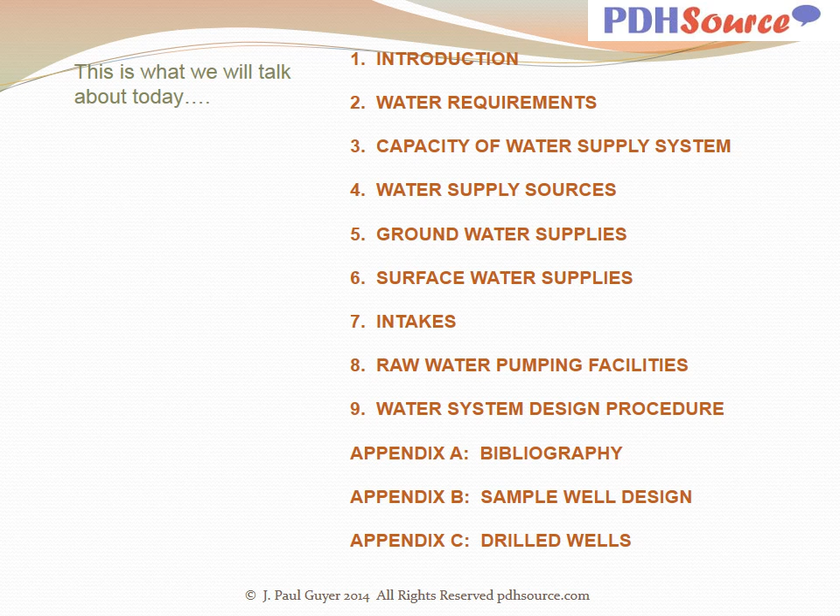This discussion provides an introduction to selecting water sources and determining water requirements for developing suitable sources of supply from ground or surface sources. These guidelines are applicable to the selection of water sources and planning and designing supply systems. There are many professional references available in the literature to engineers interested in water supply principles and practices.

The following are general definitions related to water supplies. Waterworks: all construction, structures, pipe, equipment, etc., required for the collection, transport, pumping, treatment, storage, and distribution of water. Supply works: dams, impounding reservoirs, intake structures, pumping stations, wells, and all other construction required for the development of a water supply source. Supply line: the pipeline extended from the supply source to the treatment works or distribution system.

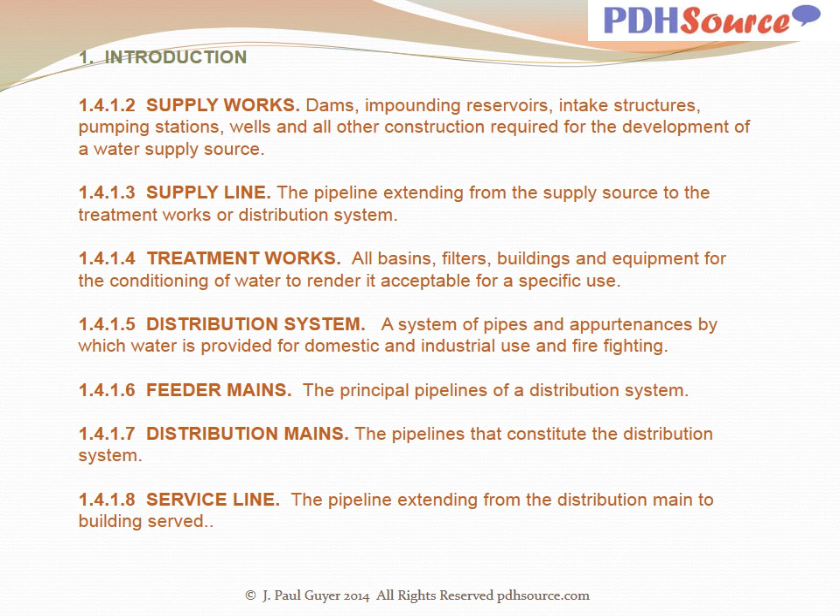Treatment works: all basins, filters, buildings, and equipment for the conditioning of water to render it acceptable for a specific use. Distribution system: a system of pipes and appurtenances by which water is provided for domestic and industrial use and firefighting. Feeder mains: the principal pipelines of a distribution system. Distribution mains: the pipelines that constitute the distribution system. Service line: the pipeline extending from the distribution main to the building served.

Effective population includes resident personnel plus an allowance for non-resident personnel, derived as follows. The design allowance for non-residents is 50 gallons per person per day, whereas that for residents is 150 gallons per person per day. Therefore, an effective population value can be obtained by adding one-third of the population figure for non-residents to the figure for residents. Effective population equals non-resident population divided by 3, plus the resident population.

Capacity factor: the multiplier applied to the effective population figure to provide an allowance for reasonable population increase, variations in water supply, uncertainties as to actual water requirements, and for unusual peak demands whose magnitude cannot be accurately estimated in advance. The capacity factor varies inversely with the magnitude of the population in the water service area. Design population: the population figure obtained by multiplying the effective population figure by the appropriate capacity factor. Design population equals effective population times the capacity factor.

Required daily demand is the total daily water requirement. Its value is obtained by multiplying the design population by the appropriate per capita domestic water allowance and adding to this quantity any special industrial, aircraft-wash, irrigation, air conditioning, or other demands. Other demands include the amount necessary to replenish, in 48 hours, the storage required for fire protection and normal operation. Where the supply is from wells, the quantity available in 48 hours of continuous operation of the wells will be used in calculating the total supply available for replenishing storage and maintaining fire, domestic, and industrial demands that cannot be curtailed.

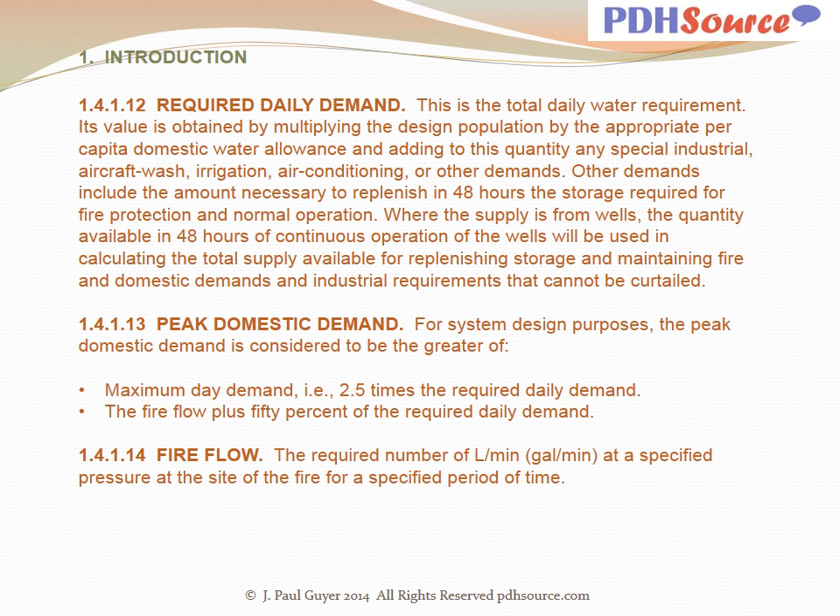Fire flow: the required number of gallons per minute at a specified pressure at the site of the fire, for a specified period of time.

Fire demand: the required rate of flow of water in gallons per minute during a specified fire period. Fire demand includes fire flow plus 50% of the required daily demand, and, in addition, any industrial or other demand that cannot be reduced during a fire period. The residual pressure is specified for either the fire flow or essential industrial demand, whichever is higher. Fire demand must include flow required for automatic sprinkler and standpipe operation, as well as direct hydrant flow demand when the sprinklers are served directly by the water supply system.

Rated capacity: the rated capacity of a supply line, intake structure, treatment plant, or pumping unit is the amount of water which can be passed through the unit when it is operating under design conditions.

Cross connection: the two types recognized are as follows. First, a direct cross connection is a physical connection between a supervised potable water supply and an unsupervised supply of unknown quality. An example of a direct cross connection is a piping system connecting a raw water supply used for industrial firefighting to a municipal water system.

Second, an indirect cross connection is an arrangement whereby unsafe water or other liquid may be blown, siphoned, or otherwise diverted into a safe water system. Such arrangements include unprotected potable water inlets in tanks, toilets, and lavatories that can be submerged in unsafe water or other liquid. Under conditions of peak usage of potable water or potable water shut off for repairs, unsafe water or other liquid may backflow directly or be back siphoned through the inlet into the potable system. Indirect cross connections are often termed backflow connections or back siphonage connections. An example is a direct potable water connection to a sewage pump for intermittent use for flushing or priming.

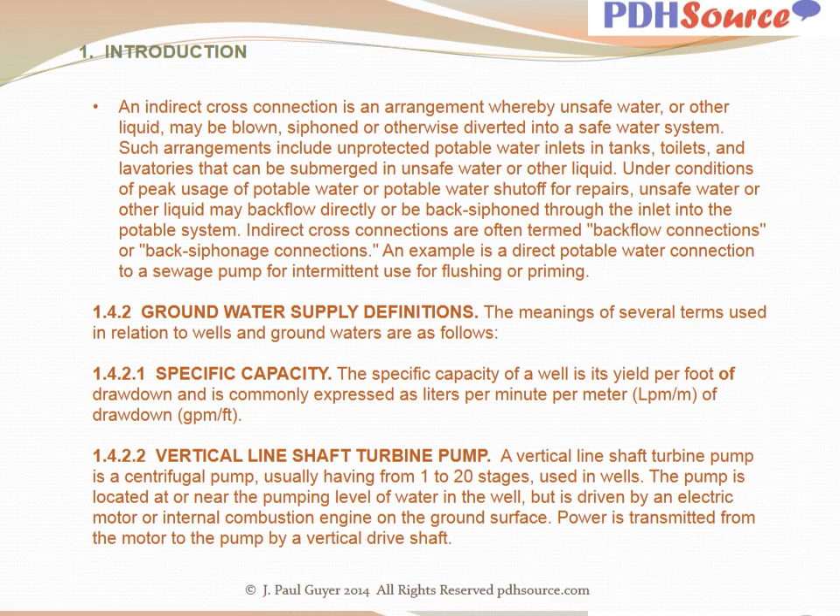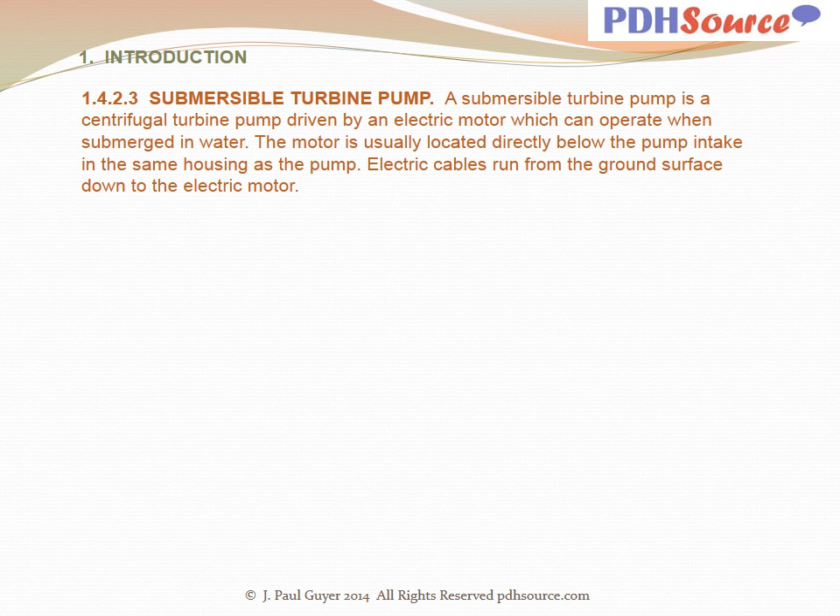Submersible turbine pump. A submersible turbine pump is a centrifugal turbine pump driven by an electric motor which can operate when submerged in water. The motor is usually located directly below the pump intake in the same housing as the pump. Electric cables run from the ground surface down to the electric motor.

Now, some comments on water requirements. First, domestic requirements. The per capita allowances given in Table 2.1 are illustrative only of domestic water requirements. These allowances do not include special purpose water uses such as industrial, commercial, institutional, air conditioning, and irrigation.

Fire flow requirements. The system must be capable of supplying the fire flow specified plus any other demand that cannot be reduced during the fire period, at the required residual pressure and for the required duration. The requirements of each system must be analyzed to determine whether the capacity of the system is fixed by the domestic requirements, by the fire demands, or by a combination of both.

Where fire flow demands are relatively high or required for long duration, and population and/or industrial use is relatively low, the total required capacity will be determined by the prevailing fire demand. In some exceptional cases, this may warrant consideration of a special water system for fire purposes, separate in part or in whole from the domestic system. However, such separate systems will be appropriate only under exceptional circumstances and in general are to be avoided.

With regard to irrigation, the allowances indicated in Table 2.1 include water for limited watering of planted and grassed areas. However, these allowances do not include major lawn or other irrigation uses.

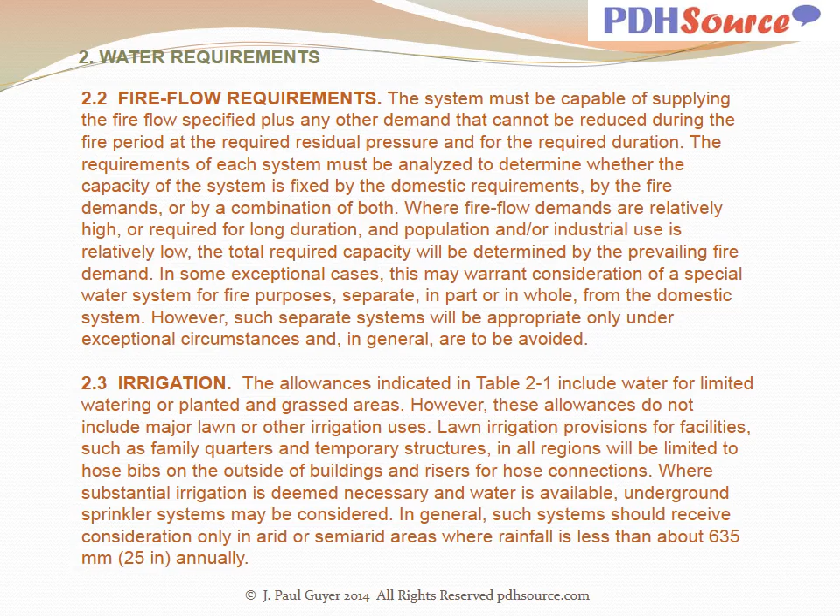Backflow prevention devices such as a vacuum breaker or an air gap will be provided for all irrigation systems connected to potable water systems. Installation of backflow preventers will be in accordance with the applicable local plumbing code. Single or multiple check valves are not acceptable backflow prevention devices and will not be used. Direct cross connections between potable and non-potable water systems will not be permitted under any circumstances.

Effluent from wastewater treatment plants can be used for irrigation when authorized. Only treated effluent having a detectable chlorine residual at the most remote discharge point will be used. Where state or local regulations require additional treatment for irrigation, such requirement will be complied with. The effluent irrigation system must be physically separated from any distribution systems carrying potable water.

A detailed plan will be provided showing the location of the effluent irrigation system in relation to the potable water distribution system and buildings. Provisions will be made either for locking this sprinkler irrigation control valve or removing the valve handle so that only authorized personnel can operate the systems. In addition, readily identifiable non-potable or contaminated notices, markings, or coatings for wastewater conveyance facilities and appurtenances will be provided.

Another possibility for reuse of treated effluent is for industrial operations where substantial volumes of water for washing or cooling purposes are required. For any reuse situations, great care must be exercised to avoid direct cross connections between the reclaimed water system and the potable water system.

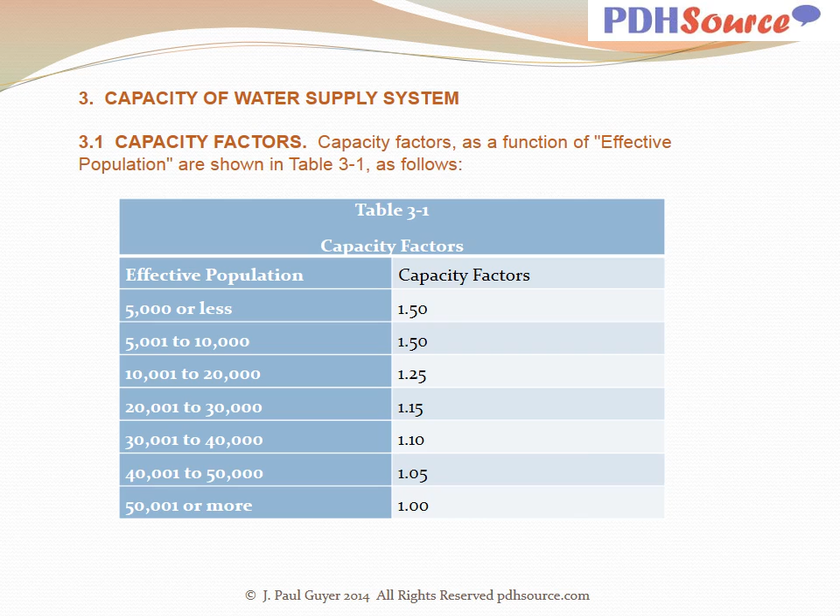The capacity factor will be used in planning water supplies for all projects, including general hospitals. The proper capacity factor is given in Table 3.1 and is multiplied by the effective population to obtain the design population. Arithmetic interpolation should be used to determine the appropriate capacity factor for intermediate project populations. For example, for an effective population of 7,200, interpolation yields a capacity factor of 1.39.

Capacity factors will be applied in determining the required capacity of the supply works, supply lines, treatment works, principal feeder mains, and storage reservoirs. Capacity factors will not be used for hotels and similar structures, and will not be applied to fire flows, irrigation requirements, or industrial demands.

The design of elements of the water supply system, except as noted, shall be based on the design population. Where special demands for water exist, such as those resulting from unusual firefighting requirements, irrigation, industrial processes, and cooling water usage, consideration must be given to these special demands in determining the design capacity of the water supply system.

Few, if any, entirely new water supply systems will be constructed. Generally, the project will involve upgrading and/or expansion of existing systems. Where existing systems are adequate to supply existing demands, plus the expansion proposed without inclusion of the capacity factor, no additional facilities will be provided except necessary extension of water mains.

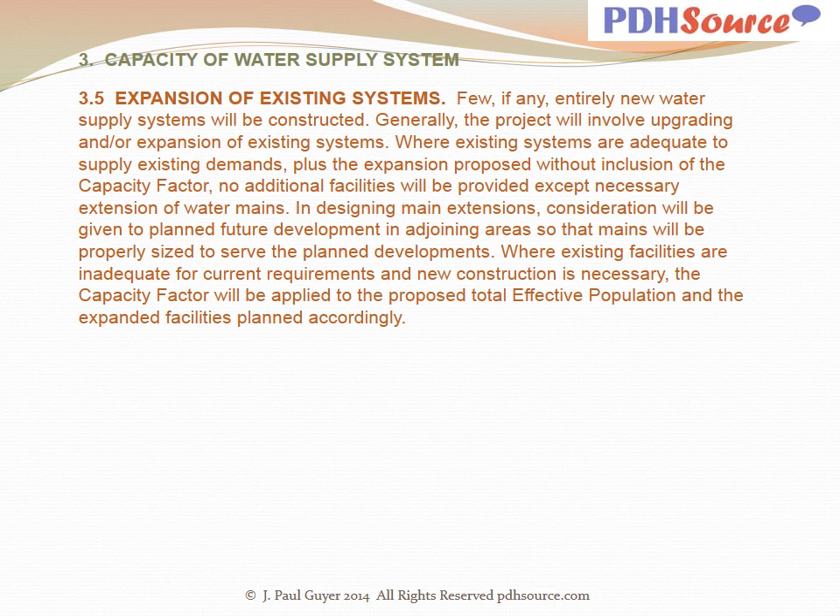Water supplies may be obtained from surface or ground sources by expansion of existing systems or by purchase from other systems. The selection of a source of supply will be based on water availability, adequacy, quality, cost of development and operation, and the expected life of the project to be served.

In general, all alternative sources of supply should be evaluated to the extent necessary to provide a valid assessment of their value for a specific installation.

Alternative sources of supply include purchase of water as well as consideration of development or expansion of independent ground and surface sources. A combination of surface and groundwater, while not generally employed, may be advantageous under some circumstances and should receive consideration. Economic as well as physical factors must be evaluated.

The final selection of the water source will be determined by feasibility studies considering all engineering, economic, energy, and environmental factors. Most water supply projects include expansion or upgrading of existing supply works rather than development of new sources.

If there is an existing water supply, thorough investigation will be made to determine its capacity and reliability and the possible arrangements that might be made for its use with or without enlargement. The economics of utilizing the existing supply should be compared with the economics of reasonable alternatives.

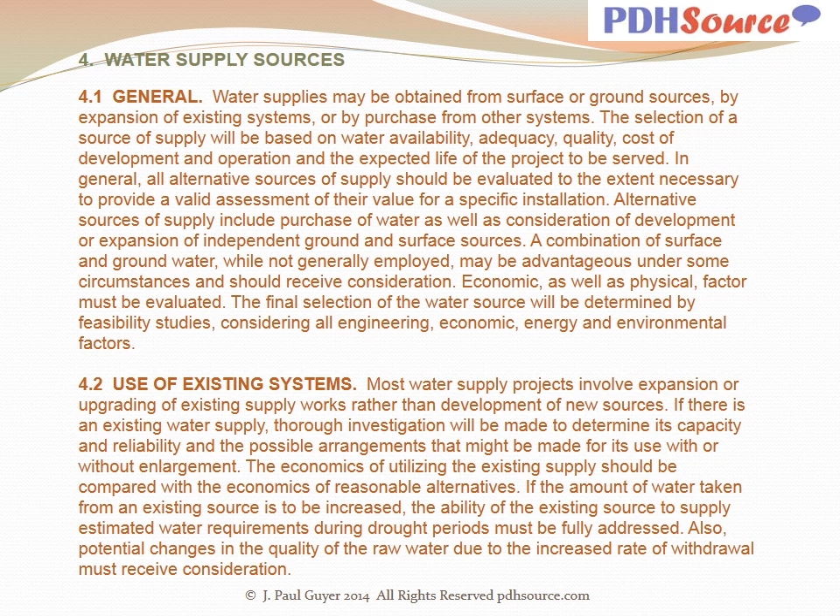If the amount of water taken from an existing source is to be increased, the ability of the existing source to supply estimated water requirements during drought periods must be fully addressed. Also, potential changes in the quality of the raw water due to the increased rate of withdrawal must be fully considered.

If the development is located near a municipality or other public or private agency operating a water supply system, this system should be investigated to determine its ability to provide reliable water service to the installation at reasonable cost. The investigation must consider future as well as current needs of the existing system, and in addition, the impact of the project on the water supply requirements in the existing water service area.

Among the important matters that must be considered are quality of the supply, adequacy of the supply during severe droughts, reliability and adequacy of raw water pumping and transmission facilities, treatment plant and equipment, high service pumping, storage and distribution facilities, facilities for transmission from the existing supply system, and costs.

In situations where a long supply line is required between the existing supply and the installation, a study will be made of the economic size of the pipeline, taking into consideration cost of construction, useful life, cost of operation, and minimum use of materials. A further requirement is an assessment of the adequacy of management, operation, and maintenance of the public water supply system.

Environmental policies, objectives, and guidelines must be observed, including guidelines for determining the adequacy of a potential raw water supply for producing an acceptable finished water supply with conventional treatment practices.

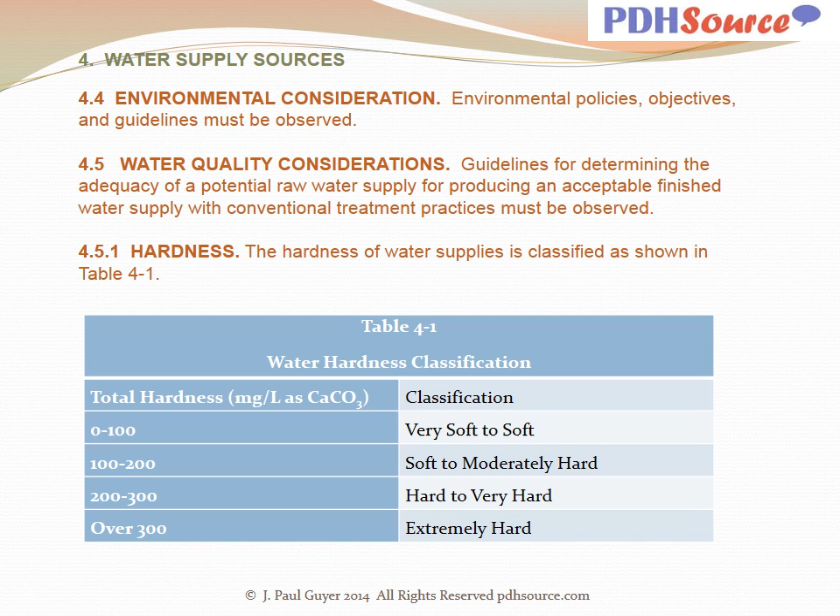Softening is generally considered when the hardness exceeds about 200 to 250 milligrams per liter. While hardness can be reduced by softening treatment, this may significantly increase the sodium content of the water where zeolite softening is employed, as well as the cost of treatment.

With regard to total dissolved solids, in addition to hardness, the quality of groundwater should be judged on the basis of dissolved mineral solids. In general, dissolved solids should not exceed 500 milligrams per liter, with 1,000 milligrams per liter as the approximate upper limit.

Chloride and sulfate cannot be removed by conventional treatment processes, and their presence in concentrations greater than about 250 milligrams per liter reduces the value of the supply for domestic and industrial use and may justify its rejection if development of an alternative source of better quality is feasible.

Saline water conversion systems such as electrodialysis or reverse osmosis are required for removal of excessive chloride or sulfate, and also certain other dissolved substances including sodium and nitrate.

The presence of certain toxic heavy metals, fluoride, pesticides, and radioactivity in concentrations exceeding recognized standards will make rejection of the supply mandatory unless unusually sophisticated treatment is provided.

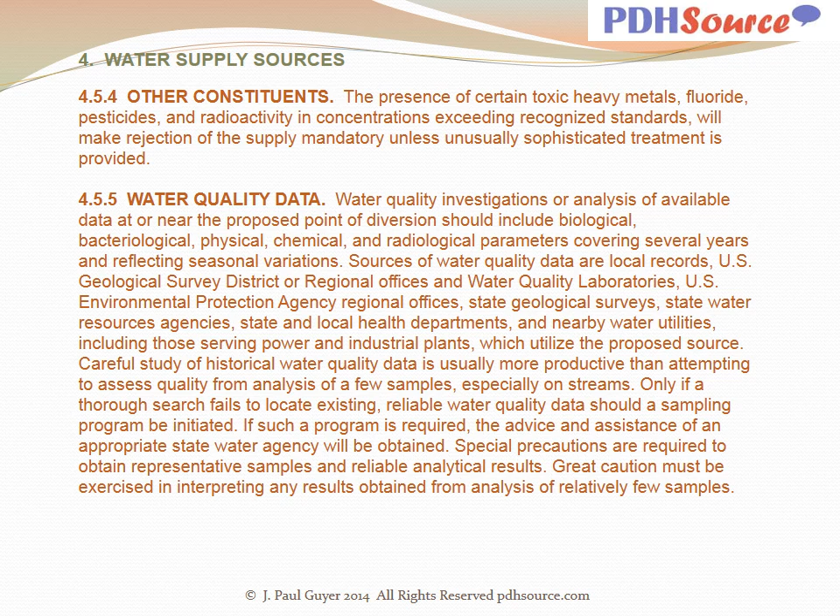If such a program is required, the advice and assistance of an appropriate state water agency will be obtained. Special precautions are required to obtain representative samples and reliable analytical results. Great caution must be exercised in interpreting any results obtained from analysis of relatively few samples.

The following items, as well as others, if circumstances warrant, will be covered in the investigation of existing sources: quality history of the supply, estimates of future quality, permits from regulating authorities and compliance history, description of source, water rights, reliability of supply.

Quantity now developed, ultimate quantity available, excess supply not already allocated, raw water pumping and transmission facilities, treatment works, treated water storage, high service pumping and transmission facilities, rates in gallons per minute at which supply is available, current and estimated future cost per 1,000 gallons, and current and estimated future cost per 1,000 gallons of water from alternative sources.

Distance from installation site to existing supply, pressure variations at point of diversion from existing system, ground elevations at points of diversion in use, energy requirements for proposed system, sources of pollution existing and potential, assessment of adequacy of management, operation, and maintenance, and modifications required to meet additional water demands resulting from supplying water system expansion.

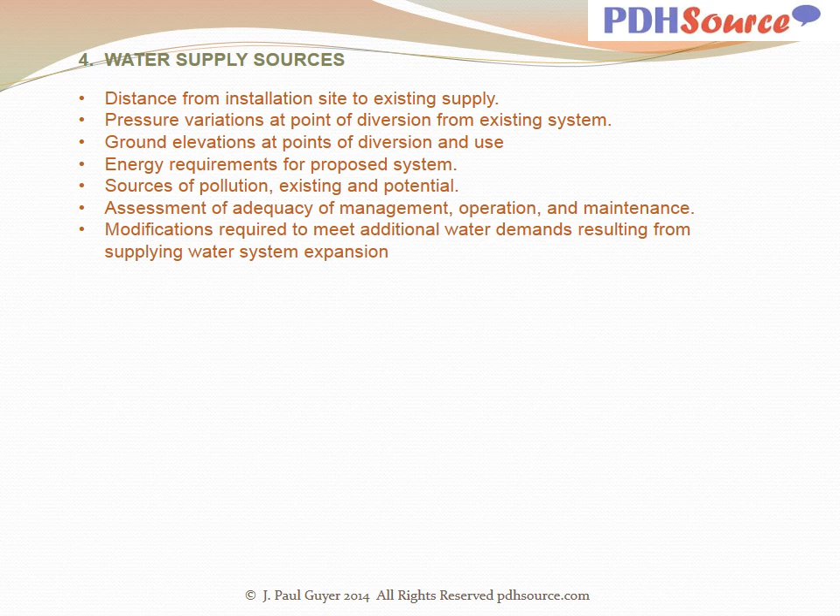Now some comments on groundwater supplies in general. Groundwater is subsurface water occupying the zone of saturation. A water-bearing geological formation which is composed of permeable rock, gravel, sand, earth, etc. and yields water in sufficient quantity to be economical is called an aquifer.

Unconfined water is found in aquifers above the first impervious layer of soil or rock. This zone is often referred to as the water table. Water infiltrates by downward percolation through the air-filled pore spaces of the overlying soil material. The water table is subjected to atmospheric and climatic conditions, falling during periods of drought or rising in response to precipitation and infiltration.

A confined aquifer is defined as the aquifer underlying an impervious bed. Areas of infiltration and recharge are often some distance away from the point of discharge. This water is often referred to as being under artesian conditions.

When a well is installed into an artesian aquifer, the water in the well will rise in response to atmospheric pressure in the well. The level to which water rises above the top of the aquifer represents the confining pressure exerted on the aquifer. Materials with interconnecting pore spaces, such as unconsolidated formations of loose sand and gravel, may yield large quantities of water and therefore are the primary target for location of wells.

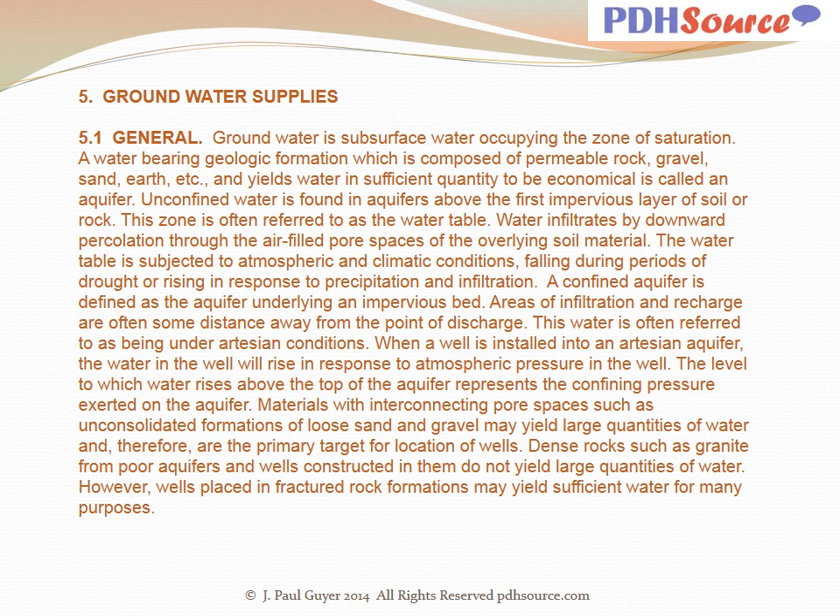Dense rocks, such as granite, form poor aquifers, and wells constructed in them do not yield large quantities of water. However, wells placed in fractured rock formations may yield sufficient water for many purposes.

The economy of groundwater versus surface water supplies needs to be carefully examined. The study should include an appraisal of operating and maintenance costs as well as capital costs. No absolute rules can be given for choosing between ground and surface water sources.

Where water requirements are within the capacity of an aquifer, groundwater is nearly always more economical than surface water. The available yield of an aquifer dictates the number of wells required and thus the capital cost of well construction. System operating and maintenance costs will depend upon the number of wells.

In general, groundwater capital costs include the wells, disinfection, pumping, and storage, with a minimum of other treatment. Surface water supply costs include intake structures, sedimentation, filtration, disinfection, pumping, and storage. Annual operating costs include the costs of chemicals for treatment, power supply, utilities, and maintenance. Each situation must be examined on its merits with due consideration for all factors involved.

Some states require that a representative of the state witness the grouting of the casing and collect an uncontaminated biological sample before the well is used as a public water supply. Some states require a permit to withdraw water from the well and limit the amount of water that can be withdrawn. All wells and well fields must be located and designed in accordance with the state wellhead protection programs and the Safe Drinking Water Act.

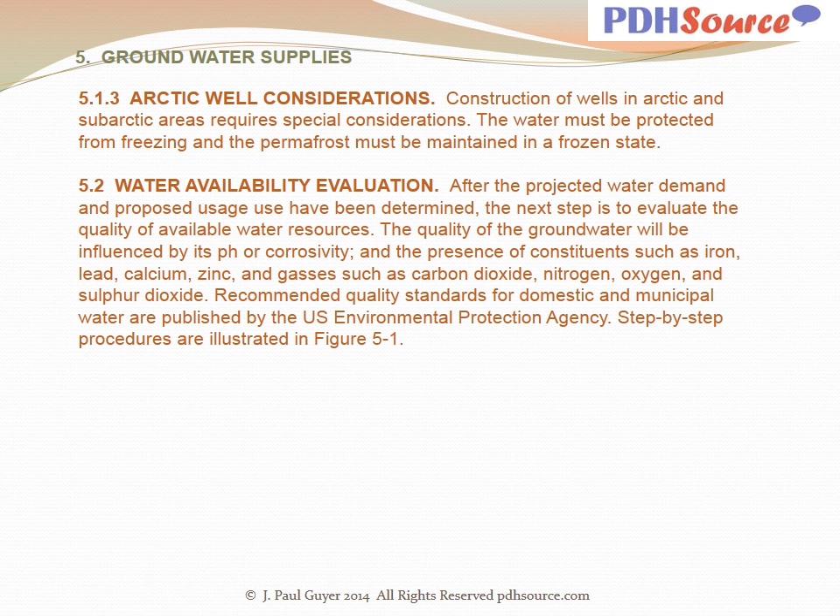Recommended quality standards for domestic and municipal water are published by the U.S. Environmental Protection Agency. Step-by-step procedures are illustrated in Figure 5.1, which indicates the steps in a water availability evaluation.

With regard to the types of wells and construction methods, wells are constructed by a variety of methods. There's no single optimum method. The choice depends on the purpose of the well, size, depth, formations being drilled through, experience of local well contractors, and cost. The most common methods of installing wells are compared in Table 5.1. The performance of different drilling methods in different formations is given in Groundwater and Wells.

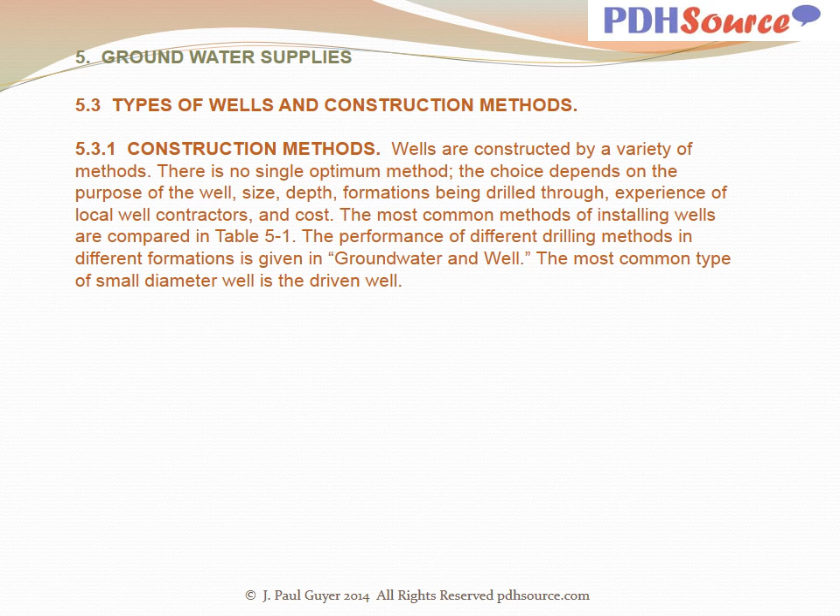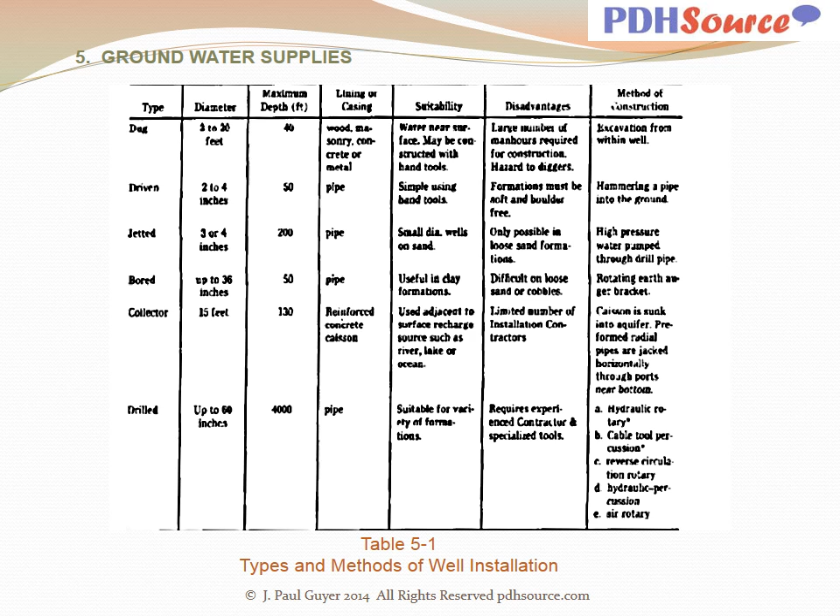The most common type of small diameter well is the driven well. Table 5.1 indicates types and methods of well installation. Types are defined in the first column, and the factors considered are the diameter, the maximum depth, the lining or casing, its suitability, the disadvantages, and the method of construction.

In some geologic environments, the aquifer may be too thin or for some other reason unable to provide the required quantity of water to a standard vertical well. In such instances, it may be economical to install collector wells. A collector well is typically constructed with a large caisson having one or more horizontal screens extending into the saturated zone. Refer to Figure 5.2. The caisson can be used as a storage tank. The disadvantage of this system is that collector wells are more expensive than standard vertical wells.

Figure 5.2 indicates a typical collector well. The water quality evaluation involves both well location and method of construction, which are of major importance in protecting the quality of water derived from a well.

Groundwater may become contaminated as a result of leakage from sources as diverse as improperly sealed wells, septic tanks, garbage dumps, industrial and animal wastes. Prior to selecting the well location, a thorough survey of the area should be undertaken.

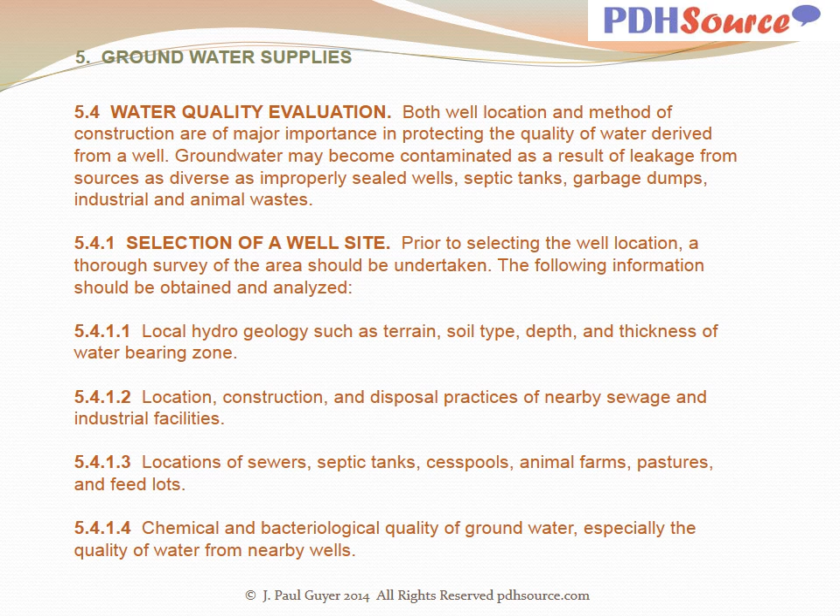The following information should be obtained and analyzed: local hydrogeology such as terrain, soil type, depth, and thickness of water-bearing zone; the location, construction, and disposal practices of nearby sewage and industrial facilities; locations of sewers, septic tanks, cesspools, animal farms, pastures, and feedlots; chemical and bacteriological quality of groundwater, especially the quality of water from nearby wells; and histories of water, oil, and gas exploration wells and development in the area.

Also needed: location and operating practices of nearby industrial and municipal landfills and dumps, and the direction and rate of travel of groundwater. Recommended minimum distances for well sites from commonly encountered potential sources of pollution are indicated in Table 5.2.

It is emphasized that these are minimum distances which can serve as rough guides for locating a well from a potential source of groundwater contamination. The distance may be greater depending upon the geology of the area.

In general, very fine sand and silt filter contaminants in groundwater better than limestone, fractured rock, coarse sand, and gravel. Chemical contaminants may persist indefinitely in untreated groundwater.

If at all possible, a well should be located up gradient of any known nearby or potential sources of contamination. It is a good practice to consult local authorities for aid in establishing safe distances consistent with the subsurface geology of the area. Dry wells should be abandoned and plugged in conformance with local regulation.

Table 5-2 provides minimum distances from pollution sources.

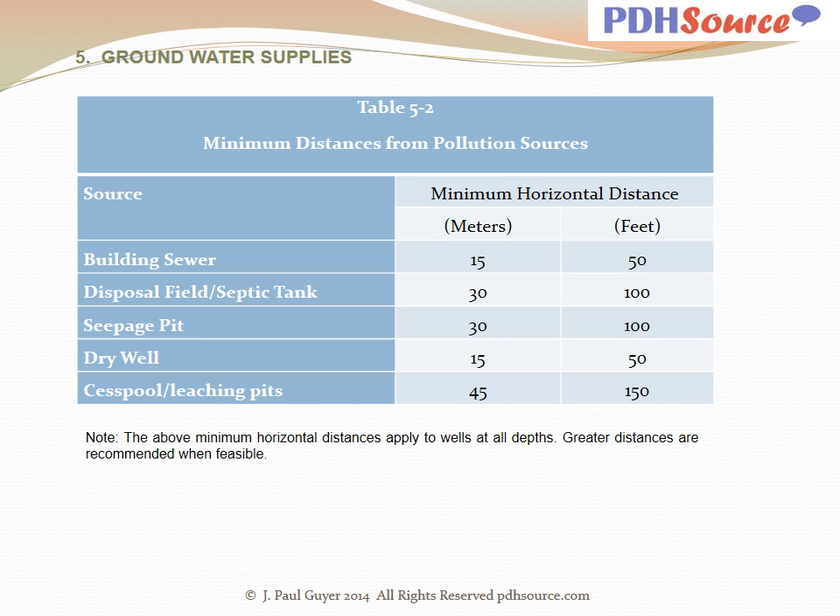It's mandatory to review the stipulations contained in the current U.S. Environmental Protection Agency's drinking water standards and state and local regulations, and to collect and chemically analyze samples as required for the determination of all constituents named in the drinking water standards.

Heavy metals and arsenic are rarely encountered in significant concentrations in natural groundwaters. However, they may be of concern in areas with metamorphic rock. Radioactive materials may cause occasional high readings in granite wells.

With regard to well hydraulics, first some definitions. The following definitions are necessary to an understanding of well hydraulics. Static water level: this is the distance from the ground surface to the water level in a well when no water is being pumped.

Pumping level: this is the distance from the ground surface to the water level in a well when water is being pumped, also called the dynamic water level.

Drawdown: this is the difference between static water level and pumping water level. Cone of depression: this is the funnel shape of the water surface or piezometric level, which is formed as water is withdrawn from the well.

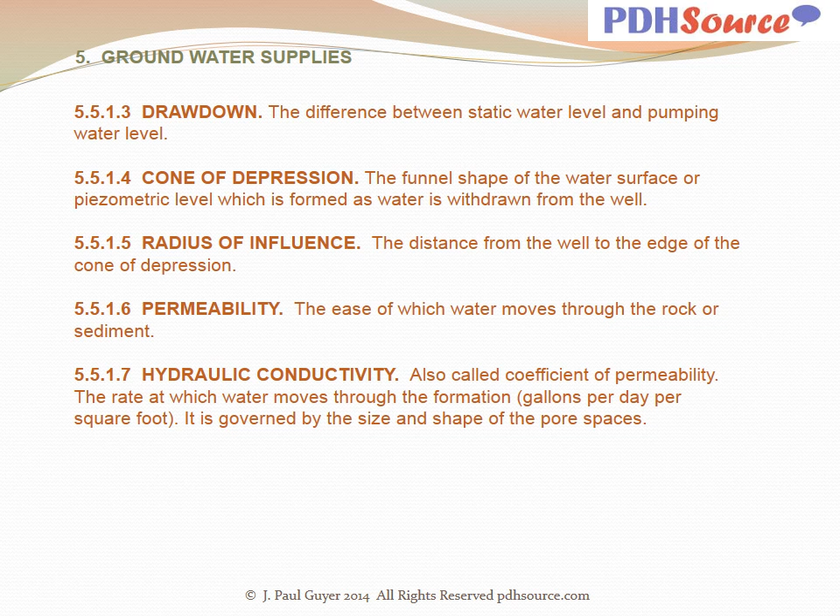Radius of influence: this is the distance from the well to the edge of the cone of depression. Permeability: this is the ease with which water moves through the rock or sediment. Hydraulic conductivity, also called the coefficient of permeability, is the rate at which water moves through the formation in gallons per day per square foot. It is governed by the size and shape of the pore spaces.

Well discharge formulas: the following formulas assume certain simplifying conditions. However, these assumptions do not severely limit the use of the formulas.

The aquifer is of constant thickness, is not stratified, and is of uniform permeability. The piezometric surface is level, laminar flow exists, and the cone of depression has reached equilibrium. The pumping well reaches the bottom of the aquifer and is 100% efficient.

There are two basic formulas for groundwater and wells: one for water table wells, equation 5.1, and one for artesian wells, equation 5.2. Figure 5.3 shows the relationship of the terms used in equation 5.1 for available yield from a water table well.

Equation 5.1 is as indicated, where Q is the pumping rate in GPM, K is the hydraulic conductivity of the water bearing unit in gallons per day per square foot, H is the static head from the bottom of the aquifer in feet, small h is the pumping head from the bottom of the aquifer in feet, capital R is the radius of influence in feet, and small r is the radius of the well in feet.

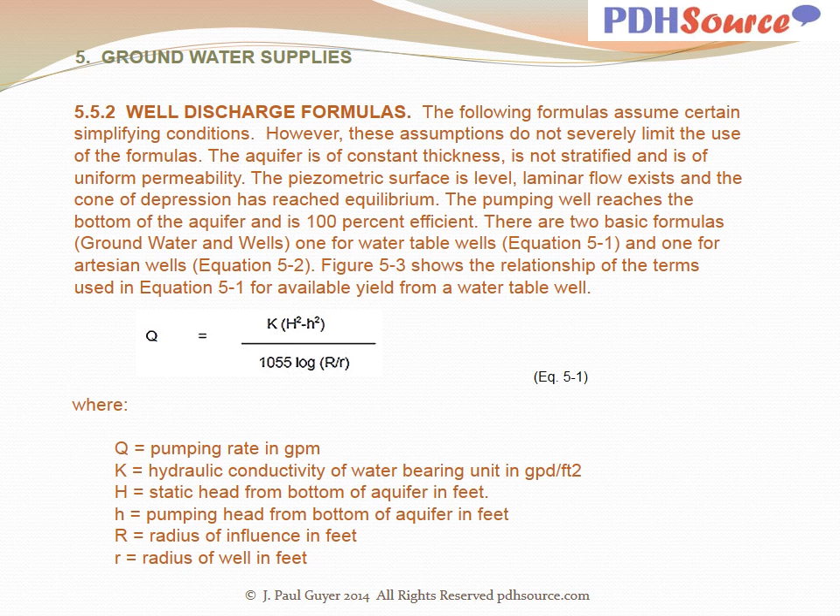Figure 5.3 is a diagram of a water table well in an unconfined aquifer.

In an artesian aquifer, the water-bearing formation is confined between two impervious strata. Figure 5.4 shows the relationship of the terms used in equation 5.2 for available yield from an artesian well.

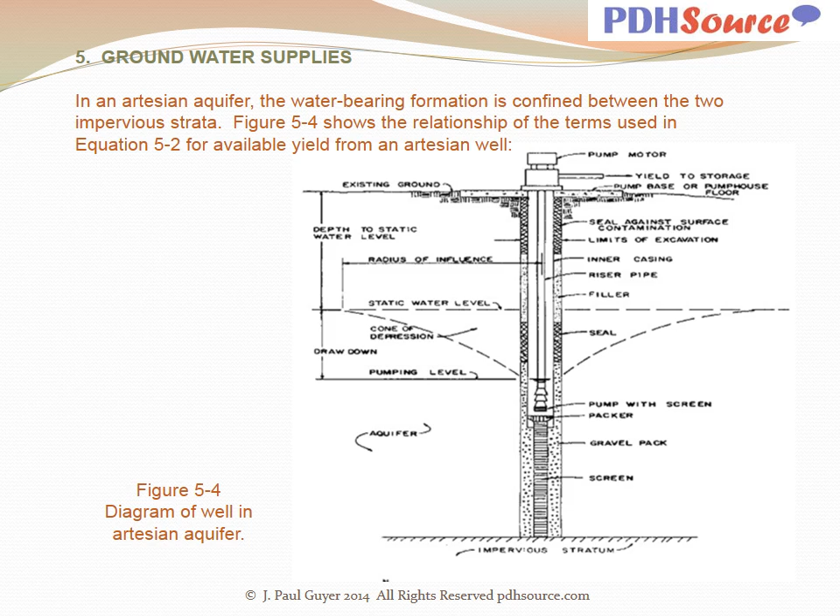The well driller's log provides the dimensions of capital H and small b. The value of R usually lies between 100 and 10,000 feet. It may be determined from observation wells or estimated. K may be determined from laboratory tests or field tests. A pumping test and observation wells may provide the values for all of these equations.

Where existing wells or other data are insufficient to determine aquifer characteristics, a pumping test may be necessary to establish values used for design. Testing consists of pumping from one well and noting the change in water table at other wells, as indicated in figures 5.3 and 5.4.

Observation wells are generally set at 50 to 500 feet from a pumped well, although for artesian aquifers they may be placed at distances up to 1,000 feet. A greater number of wells allows the slope of the drawdown curve to be more accurately determined.

The most common methods of aquifer testing are the step drawdown method, which involves pumping one well and observing what happens in observation wells. The well is pumped at a slow, constant rate until the water level stabilizes. It is then pumped at a higher rate until the water level again stabilizes. At least 3 steps are normally performed.

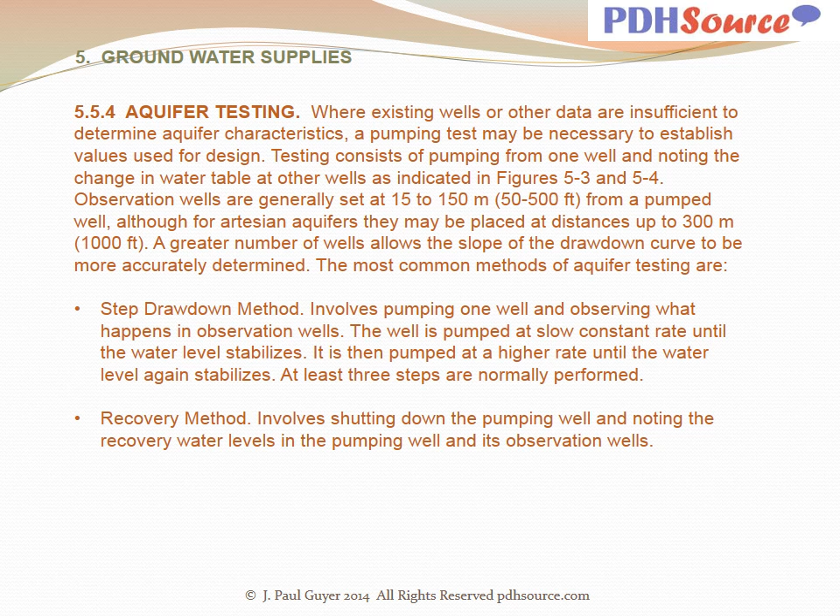A slug test involves the introduction or removal of a slug or volume of water into the well, then measuring the rise or fall in water level. The test can also be performed by inserting and removing a solid cylinder into the water. A bailer test, in which water is removed from the well using a bailer of known volume as rapidly as possible until the well is empty or the water level stabilizes, notes the volume and unit of time.

A simplified example is given in Appendix B when conducting aquifer tests by methods such as the drawdown method. It is important to note accurately the yield and corresponding drawdown.

A good testing program conducted by an experienced geologist will account for or help to define the following aquifer characteristics: the type of aquifer, the water table, confined, artesian, slope of aquifer, direction of flow, boundary effects, influence of recharge, stream or river, lake, non-homogeneity, and leaks from aquifer.

Well design methods and construction techniques are basically the same for wells constructed in consolidated or unconsolidated formations, when only one aquifer is being penetrated. Typically, wells constructed in an unconsolidated formation require a screen to line the lower portion of the borehole. An artificial gravel pack may or may not be required. A diagrammatic section of a gravel packed well is shown in figure 5.5.

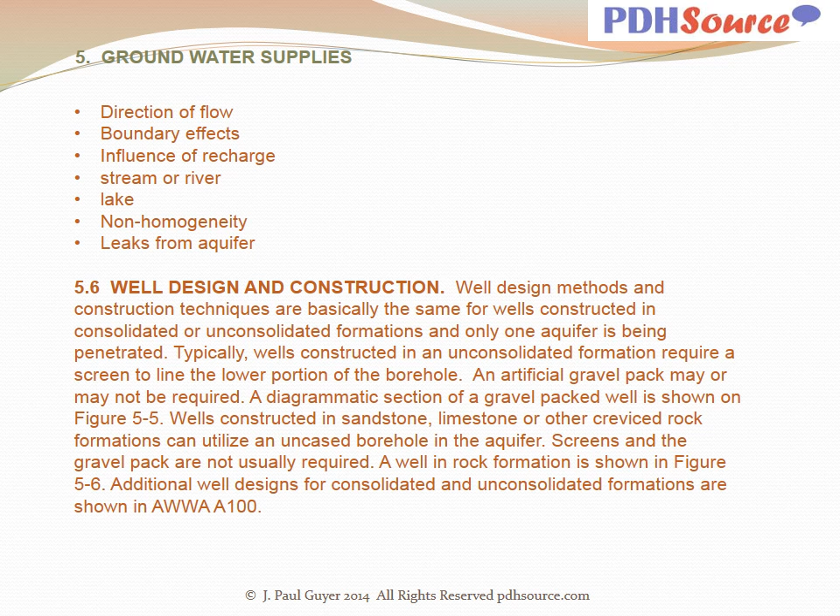The diameter of a well has a significant effect on the well's construction cost. The diameter need not be uniform from top to bottom. Construction may be initiated with a certain size casing, but drilling conditions may make it desirable to reduce the casing size at some depth. However, the diameter must be large enough to accommodate the pump, and the diameter of the intake section must be consistent with hydraulic efficiency. The well shall be designed to be straight and plumb.

The factors that control diameter are: 1. Yield of the well. 2. Intake entrance velocity. 3. Pump size. 4. Construction method. The pump size, which is related to yield, usually dominates. Approximate well diameters for various yields are shown in Table 5.3.

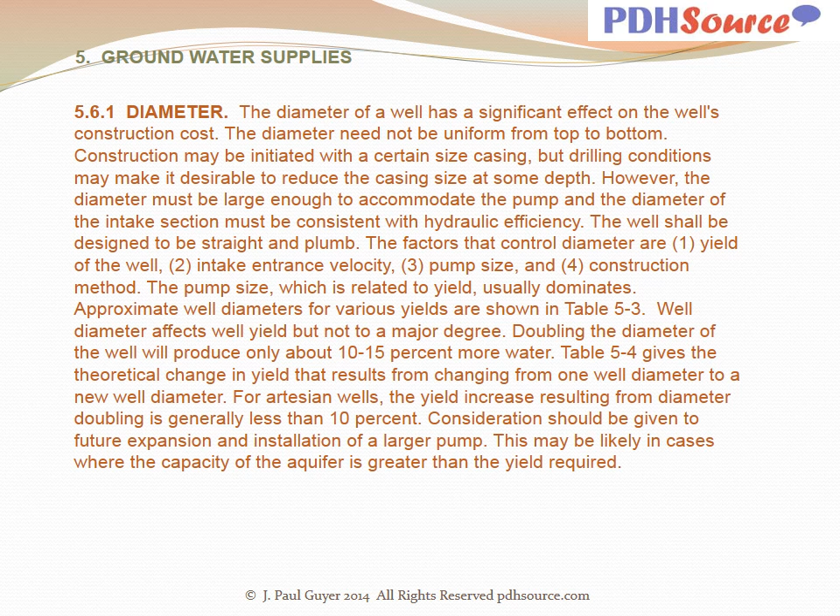Well diameter affects well yield, but not to a major degree. Doubling the diameter of the well will produce only about 10 to 15% more water. Table 5.4 gives the theoretical change in yield that results from changing from one well diameter to a new well diameter. For artesian wells, the yield increase resulting from diameter doubling is generally less than 10%. Consideration should be given to future expansion and installation of a larger pump, which may be likely in cases where the capacity of the aquifer is greater than the yield required.

The depth of a well is usually determined from the logs of test holes or from logs of other nearby wells that utilize the same aquifer. A well that is screened the full length of the water-bearing stratum has a potential for greater discharge than a unit that is not fully screened. Where the water-bearing formations are thick, cost may be the deciding factor in how deep the wells are installed. Cost, however, is usually balanced by the savings from a potentially long-term source of water.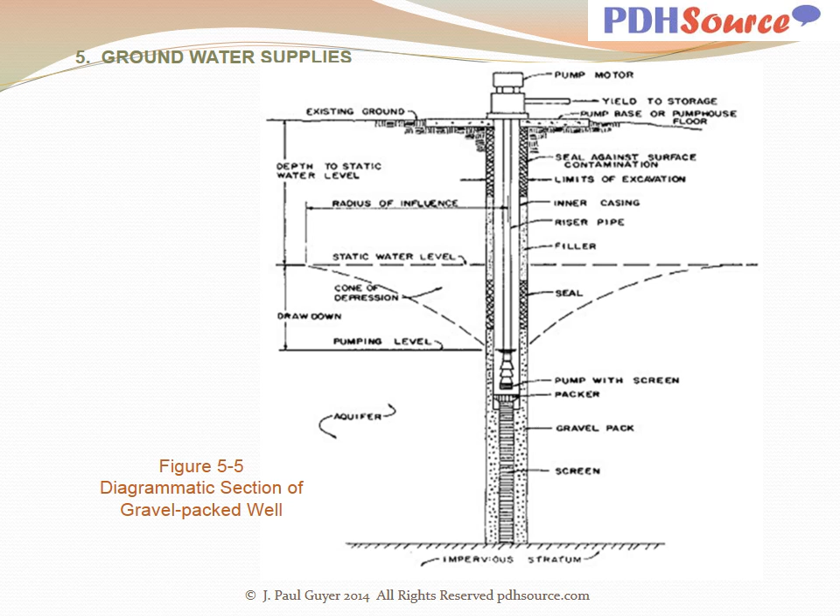Figure 5.5 is a diagrammatic section of a gravel-packed well. Figure 5.6 is a well in a rock formation. Table 5.3 shows the relationship between well diameter and anticipated yield. Table 5.4 indicates the change in yield for variation in well diameter.

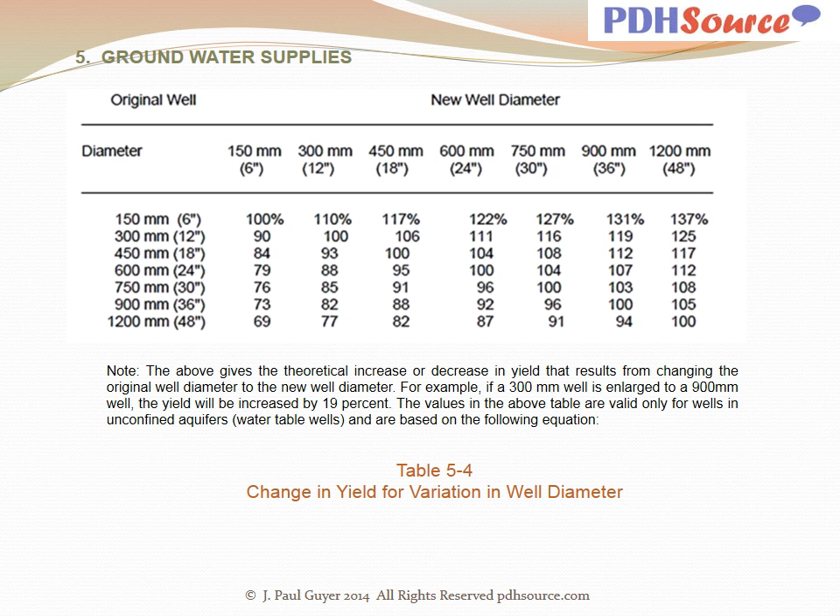In a well developed in a sand and gravel formation, the casing should extend to a minimum of 5 feet below the lowest estimated pumping level. In consolidated formations, the casing should be driven 5 feet into bedrock and cemented in place for its full length. The minimum wall thickness for steel pipe used for casing is 1/4 inch. For various diameters, the EPA recommends the wall thicknesses indicated in Table 5.5, which shows casing wall thicknesses for various diameters.

In the percussion method of drilling, where sloughing is a problem, it is customary to drill and drive the casing to the lower extremity of the aquifer to be screened, then install the appropriate size screen inside the casing before pulling the casing back and exposing the screen to the water-bearing formation.

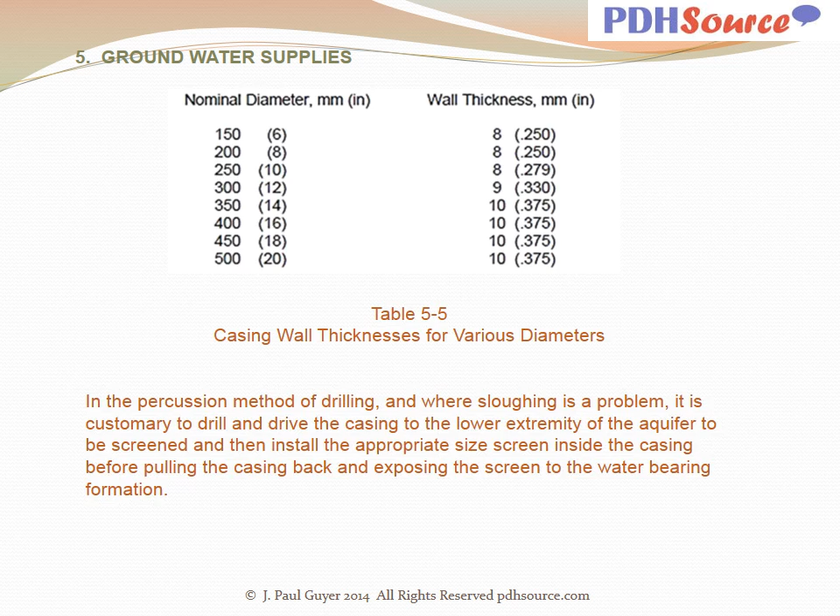Wells completed in sand and gravel with open-end casings, not equipped with a screen on the bottom, usually have limited capacity due to the small intake area of the open end of the casing pipe, and tend to pump large amounts of sand. A well-designed screen permits utilizing the permeability of the water-bearing materials around the screen. For a well completed in a sand-gravel formation, use of a well screen will usually provide much more water than if the installation is left open-ended. The screen functions to restrain sand and gravel from entering the well, which would diminish yield, damage pumping equipment, and deteriorate the quality of the water produced.

Wells developed in hard rock areas do not need screens if the well wall is sufficiently stable and sand pumping is not a problem.

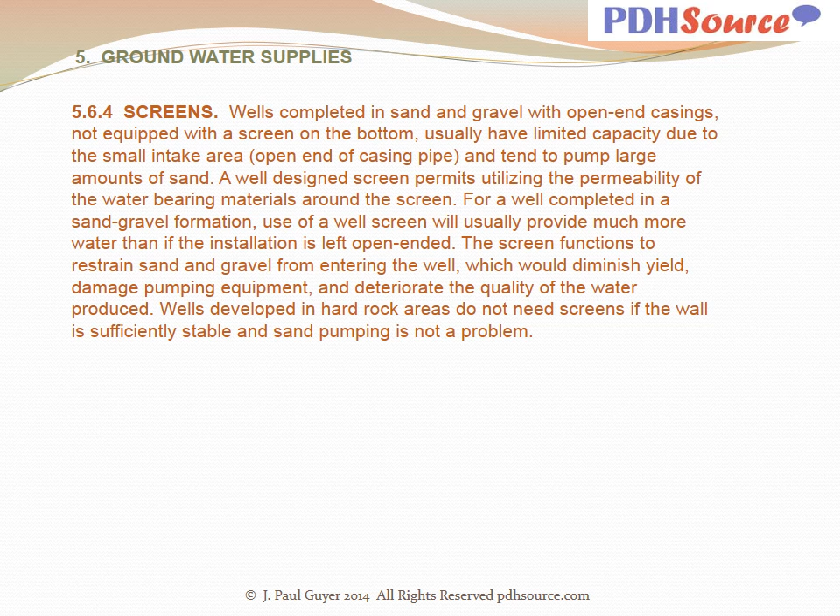The well screen aperture opening, called the slot size, is selected based on sieve analysis data of the aquifer material for a naturally developed well. For a homogeneous formation, the slot size is selected as one that will retain 40 to 50% of the sand. Use 40% where the water is not particularly corrosive and a reliable sample is obtained. Use 50% where water is very corrosive and/or the sample may be questionable.

Where a formation to be screened has layers of differing grain sizes and gradations, multiple screen slot sizes may be used. Where fine sand overlays a coarser material, extend the fine slot size at least 3 feet into the coarser material. This reduces the possibility that slumping of the lower material will allow finer sand to enter the coarse screen. The coarse aperture size should not be greater than twice the fine size.

For a filter-packed well, the screen should retain 85 to 100% of the filter material. Screen aperture size should be determined by a laboratory experienced in this work based on a sieve analysis of the material to be screened. Consult the manufacturer's literature for current data on screens.

Screen length depends on aquifer characteristics, aquifer thickness, and available drawdown.

For a homogeneous confined artesian aquifer, 70 to 80% of the aquifer should be screened, and the maximum drawdown should not exceed the distance from the static water level to the top of the aquifer. For a non-homogeneous artesian aquifer, it's usually best to screen the most permeable strata. Determinations of permeability are conducted in the laboratory on representative samples of the various strata.

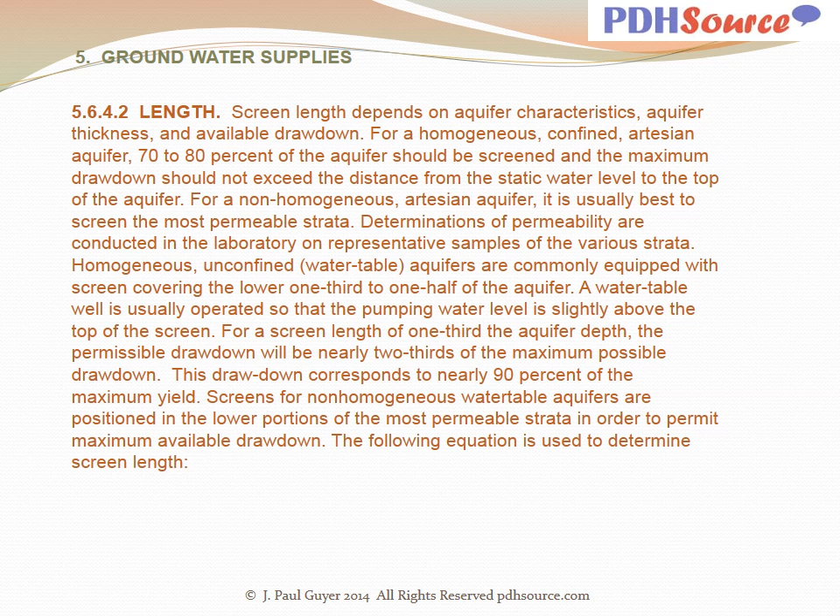Screens for non-homogeneous water table aquifers are positioned in the lower portions of the most permeable strata in order to permit maximum available drawdown. The following equation is used to determine screen length, indicated here as equation 5.4. The screen diameter shall be selected so that the entrance velocity through the screen openings will not exceed 0.1 foot per second.

The entrance velocity is calculated by dividing the well yield in cubic feet per second by the total area of the screen openings in square feet. This will ensure the following: the hydraulic losses in the screen opening will be negligible, the rate of incrustation will be minimal, and the rate of corrosion will be minimal. Various procedures may be used for installation of well screens as follows.

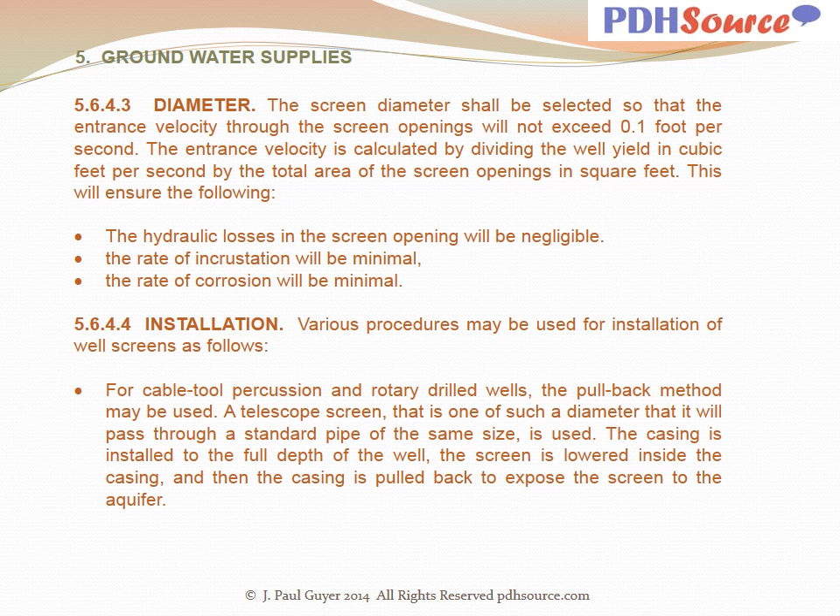For cable tool percussion and rotary drilled wells, the pullback method may be used. A telescope screen, that is, one of such a diameter that it will pass through a standard pipe of the same size, is used. The casing is installed to the full depth of the well, the screen is lowered inside the casing, and then the casing is pulled back to expose the screen to the aquifer.

In the bail-down method, the well and casing are completed to the finished grade of the casing, and the screen fitted with a bail-down shoe is let down through the casing in telescope fashion. The sand is removed from below the screen and the screen settles down into the final position.

For the washdown method, the screen is set as on the bail-down method. The screen is lowered to the bottom and a high velocity jet of fluid is directed through a self-closing bottom fitting on the screen, loosens the sand and allows the screen to sink to a final position.

If filter packing is used, it is placed around the screen after being set by one of the above methods. A seal called a packer is provided at the top of the screen. Lead packers are expanded with a swedge block. Neoprene packers are self-sealing. In the hydraulic rotary method of drilling, the screen may be attached directly to the bottom of the casing before lowering the whole assembly into the well.

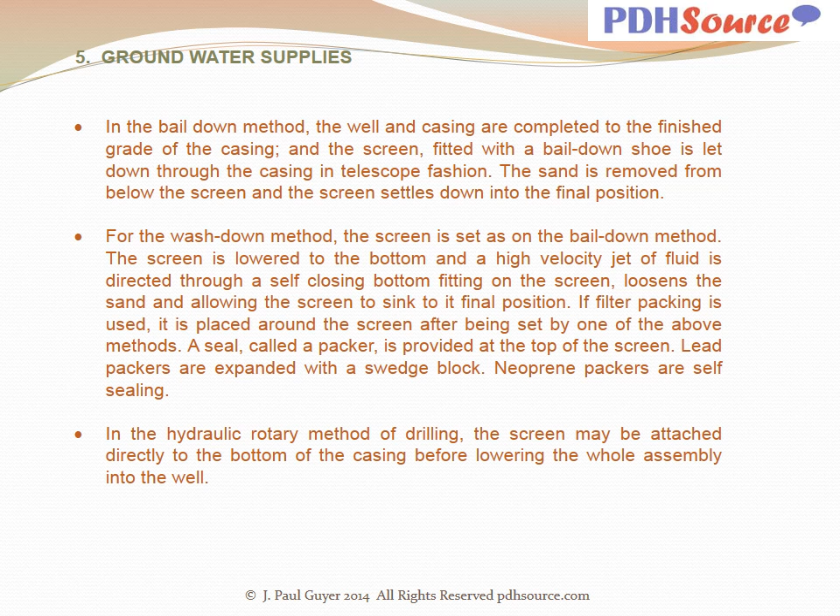Filter packing, sometimes referred to as gravel packing, is primarily sand placed around the well screen to stabilize the aquifer and provide a radius of high permeability around the screen. This differs from the naturally developed well in that the zone around the screen is made more permeable by the addition of coarse material. Filter pack material is more effective when it is composed of clean, rounded, siliceous sand or gravel.

Grain size of the filter pack is selected based on information obtained from sieve analysis of the material in the aquifer. The well screen aperture size will be selected so that between 85 and 100% of the filter pack is larger than the screen openings.

Based on these sieve analyses, determine the aquifer stratum which is composed of the finest material. Using the results of the sieve analysis for the finest aquifer material, plot the cumulative percent of the aquifer material retained versus the size of the mesh for each sieve. Fit a smooth curve to these points. Find the size corresponding to a 70% cumulative retention of aquifer material.

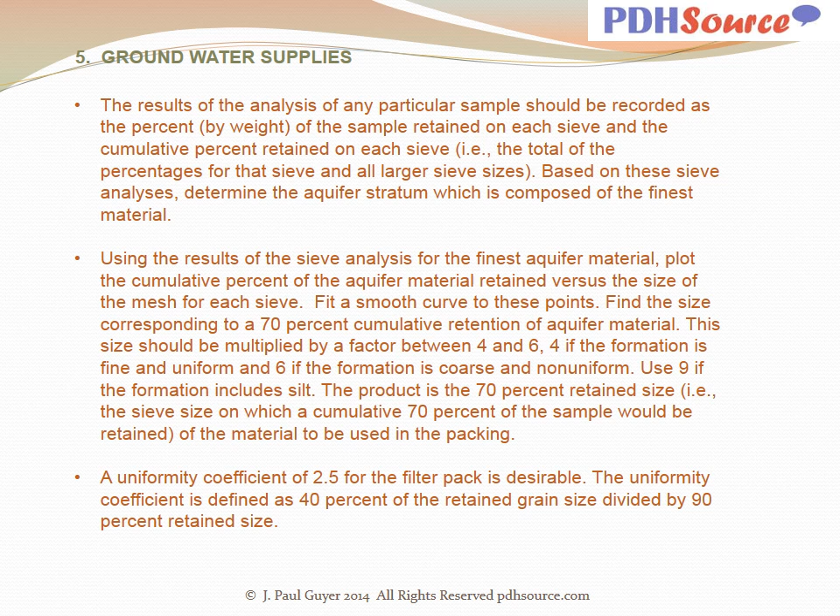A uniformity coefficient of 2.5 for the filter pack is desirable. The uniformity coefficient is defined as the 40% retained grain size divided by the 90% retained size. A lower value represents a more uniform material and is more meaningful for values less than 5.

The plot of cumulative percent retention versus grain size for the filter pack should be approximately parallel to the same plot for the aquifer material, should pass through the 70% retention value, and should have 40 and 90% retention values such that the uniformity coefficient is less than 2.5. Filter pack material will be specified by determining the sieve sizes that cover the range of the curve and then defining an allowable range for the percent retention on each sieve.

It's important that the filter used for packing be clean and that it also be disinfected by immersion in a strong chlorine solution - 200 milligrams per liter or greater available chlorine concentration, prepared by dissolving fresh chlorinated lime or other chlorine compound in water just prior to placement. Dirty filter must be thoroughly washed with clean water prior to disinfection and then handled in a manner that will maintain it in as clean a state as possible.

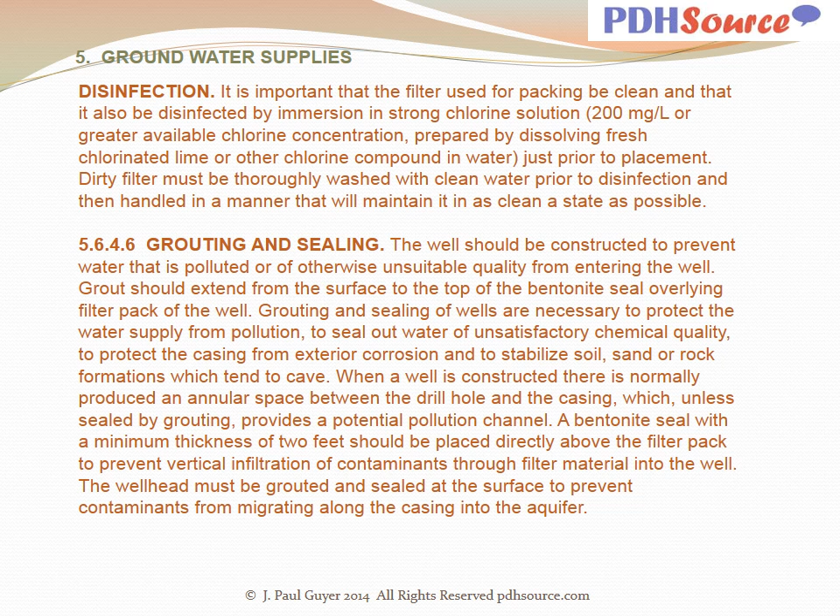The well casing and the grout seal should extend from the surface to the depth necessary to prevent surface contamination via channels through soil and rock strata. The depth required depends on the character of the formations involved and the proximity of sources of pollution such as sinkholes and sewage disposal systems.

The grout around the casing should extend from the top of the bentonite seal to the surface of the well. Local regulations may govern the composition and placement of the grout. Materials for sealing and grouting should be durable and readily placed. Normally, Portland cement grout will meet these requirements. Grout is normally specified as a neat cement mixture having a water-cement ratio of not over 6 gallons per 94-pound sack of cement. Small amounts of bentonite clay may be used to improve fluidity and reduce shrinkage.

Grout can be placed by various methods, but to ensure a satisfactory seal, it's essential that grouting be done as one continuous operation, completely placed before the initial set occurs, and introduced at the bottom of the space to be grouted.

The well location shall be readily accessible for pump repair, cleaning, disinfection, testing, and inspection. The top of the well shall never be below surface grade. At least 2 feet of clearance beyond any building projection shall be provided.

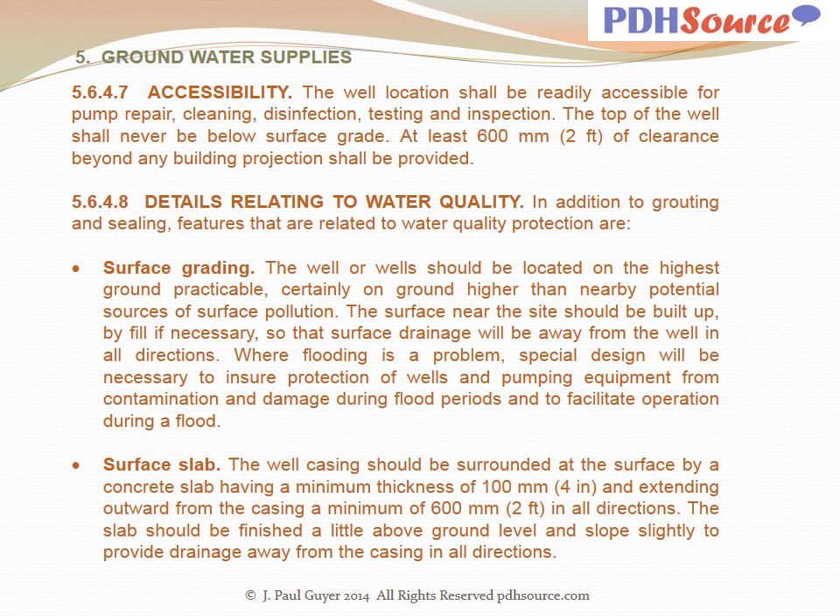The well casing should be surrounded at the surface by a concrete slab having a minimum thickness of 4 inches and extending outward from the casing a minimum of 2 feet in all directions. The slab should be finished a little above ground level and slope slightly to provide drainage away from the casing in all directions.

The well casing should extend at least 12 inches above the level of the concrete surface slab in order to provide ample space for a tight surface seal at the top of the casing. The type of seal to be employed depends on the pumping equipment specified.

While not universally required, it's usually advisable to construct a permanent well house, the floor of which can be an enlarged version of the surface slab. The floor of the well house should slope away from the casing towards the floor drain at the rate of about 1/8 inch per foot.

Floor drains should discharge through carefully jointed 4-inch or larger pipe of durable watertight material to the ground surface 20 feet or more from the well. The end of the drain shall be fitted with a coarse screen. Well house floor drains ordinarily should not be connected to storm or sanitary sewers, to prevent contamination from backup.

The well house should have a large entry door that opens outward and extends to the floor. The door should be equipped with a good quality lock. The well house design should be such that the well pump's motor and drop pipe can be removed readily.

The well house protects valves and pumping equipment and also provides some freeze protection for the pump discharge piping beyond the check valve. Where freezing is a problem, the well house should be insulated and a heating unit installed. The well house should be of fireproof construction.

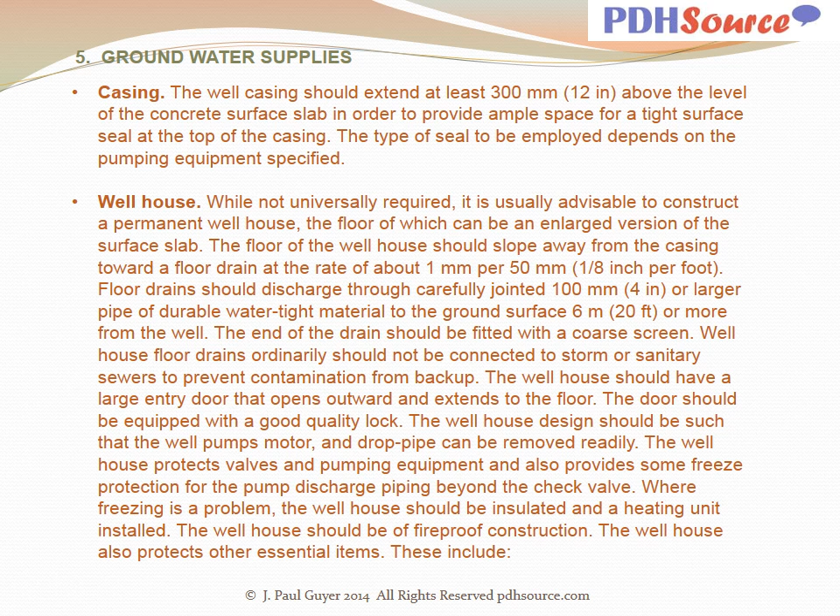The well house also protects other essential items. These include flow meter, depth gauge, pressure gauge, screened casing vent, sampling tap, water treatment equipment if required, and well operating records. If climatic or other conditions are such that a well house is not necessary, then the well should be protected from vandals or unauthorized use by a security fence having a lockable gate.

Pit construction is only acceptable under limited conditions, such as temporary or intermittent use installations where the well pump must be protected from the elements when not in use. The design must allow for cleaning and disinfection.

Underground pitless construction for piping and wiring may be adequate for submersible pump installations. These designs may be used only when approved by the responsible medical authority.

The grouping of wells must be carefully considered because of mutual interference between wells when their cones of depression overlap. Minimum well spacing shall be 250 feet.

Drawdown interference, the drawdown of a well or any other location on the water table, is a function of the number of wells being pumped, the distance from the point of measurement to pumping wells, the volume of discharge at each well, and the penetration of each well into the aquifer.

For simple systems of 2 or 3 wells, the method of superposition may be used. The procedure is to calculate the drawdown at the point well of consideration, and then to add the drawdown for each well in the field. For multiple wells, the discharge must be recalculated for each combination of wells, since multiple wells have the effect of changing the depth of water in equation 5.1.

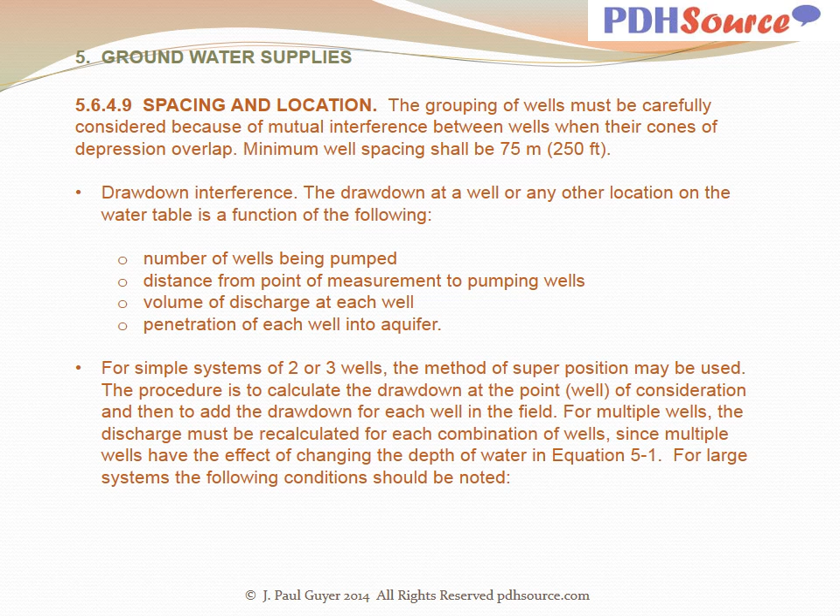For large systems, the following conditions shall be noted. Boundary conditions may change. Change in recharge could occur. Recharge may change water temperature. An increase in water temperature increases the coefficient of permeability. Computer analysis may be helpful to recalculate the combinations.

It is seldom practicable to eliminate interference entirely because of pipeline and other costs, but it can be reduced to manageable proportions by careful wellfield planning.

When an aquifer is recharged in roughly equal amounts from all directions, the cone of depression is nearly symmetrical about the well, and R is about the same in all directions. If, however, substantially more recharge is obtained from one direction, for example a stream, then the surface elevation of the water table is distorted, being considerably higher in the direction of the stream.

The surface of the cone of depression will be depressed in the direction of an impermeable boundary because little or no recharge is obtained from the direction of the impermeable boundary.

Where a source of recharge, such as a stream, exists near the proposed well field, the best location for the wells is spaced out along a line as close as practicable to and roughly parallel to the stream. On the other hand, multiple water supply wells should be located parallel to and as far as possible from an impermeable boundary. Where the field is located over a buried valley, the wells should be located along and as close to the valley's center as possible.

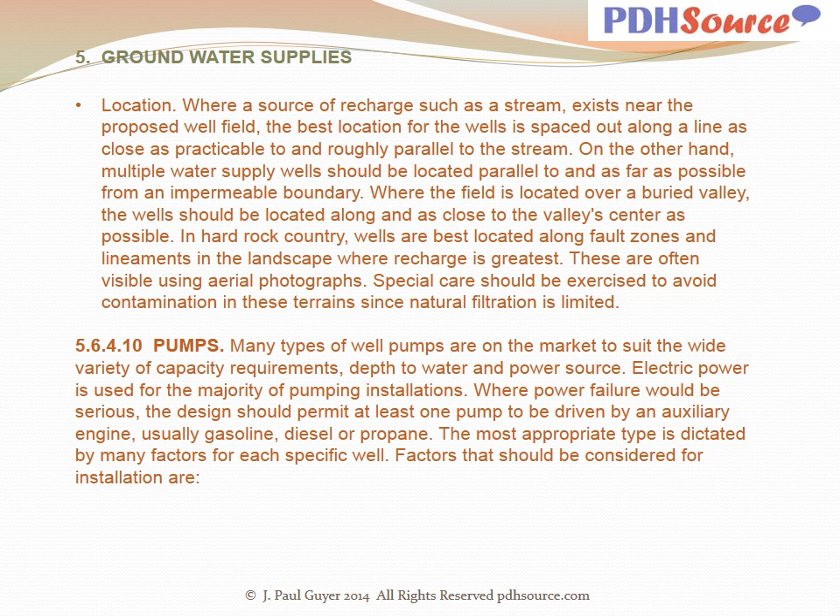The most appropriate type is dictated by many factors for each specific well. Factors that should be considered for installation are the capacity of the well, the power source, the capacity of the system, standby equipment, size of the well, well drawdown, depth of water, total dynamic head, and the type of well.

There are several types of well pumps. The most common are line shaft turbine, submersible turbine, or jet pumps. The first two operate on exactly the same principle, the difference being where the motor is located. Line shaft turbine pumps have the motor mounted above the water line of the well, and submersible turbine pumps have the motor mounted below the water line of the well.

Jet pumps operate on the principle of suction lift. A vacuum is created sufficient to pull water from the well. This type of pump is limited to wells where the water line is generally no more than 25 feet below the pump suction. It also has small capacity capability.

Domestic systems commonly employ jet pumps or small submersible turbine pumps for lifts under 25 feet. For deeper wells with high capacity requirements, submersible or line shaft turbine pumps are usually used and are driven by electric motors. A number of pump bowls may be mounted in series, one above the other, to provide the necessary discharge pressure. Characteristics for various types of pumps used in wells are listed in Table 5.6.

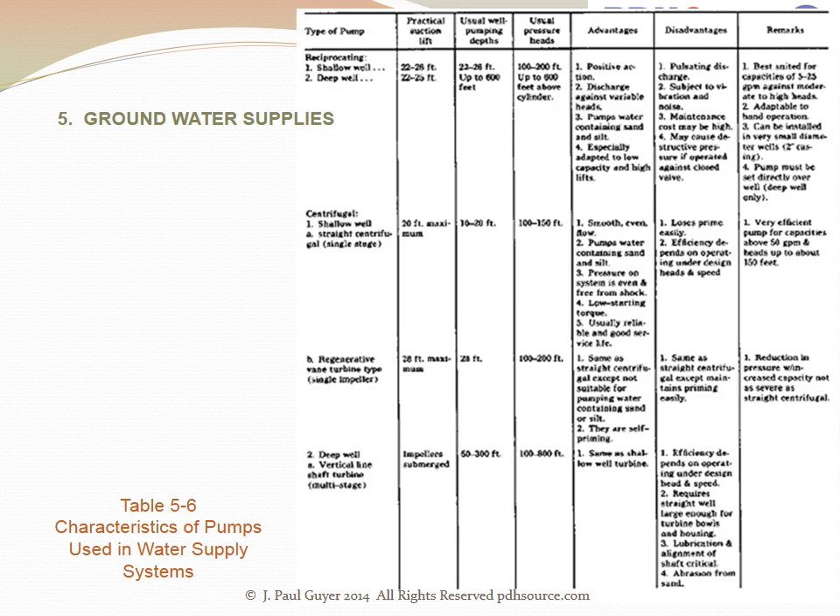The design capacity of the pump must exceed the system requirements. However, the capacity of the pump must not exceed the capacity of the well. Pump manufacturers publish charts giving the pump discharge capacity for their particular pumps at various operating pressures.

The total dynamic head of the system must be calculated accurately from the physical arrangement, represented by equation 5.5, where H sub S is the suction lift, the vertical distance from the water line at drawdown under full capacity to the pump center line. H sub D is the discharge head, the vertical distance from the pump center line to the pressure level of the discharge pipe system. H sub F is the friction head, the loss of head on pipelines and fittings, and V squared divided by 2G is the velocity head necessary to maintain flow.

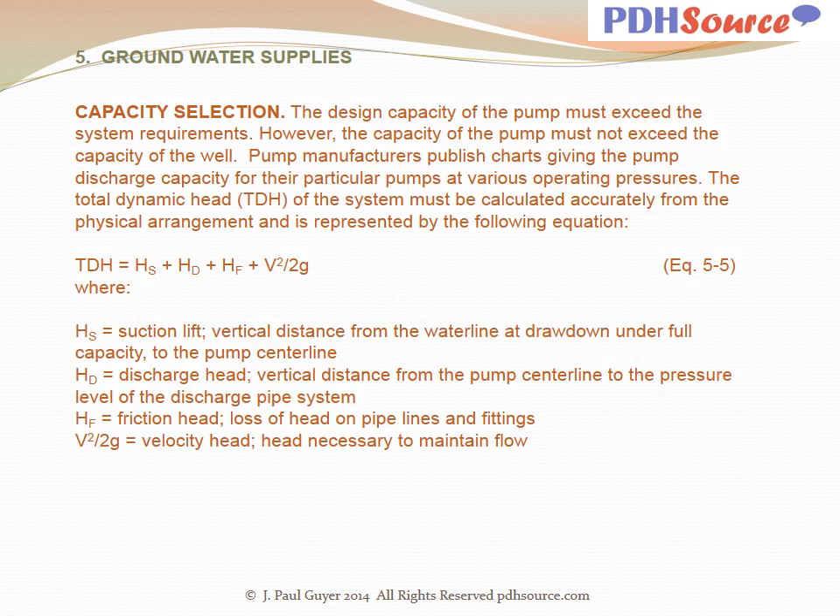The brake horsepower of the motor used to drive the pump may be calculated from equation 5-6, where P is the brake horsepower required, H is the total dynamic head in feet, Q is the volume of water in gallons per minute, and E is the combined efficiency of the pump and motor.

After the structure of the well is installed, there remain two very important operations to be performed before the well can be put into service. Well development is the process of removing the finer material from the aquifer around the well screen, thereby cleaning out and opening up passages in the formation so that water can enter the well more freely. Disinfection is the process of cleaning and decontaminating the well of bacteria that may be present due to the drilling action.

With regard to development, three beneficial aspects of well development are to correct any damage or clogging of the water-bearing formation which occurred as a side effect of drilling, to increase the permeability of the formation in the vicinity of the well, and to stabilize the formation around a screened well so that the well will yield sand-free water.

A naturally developed well relies on the development process to generate a highly permeable zone around the well screen or open rock face. This process depends upon pulling out the finer materials from the formation, bringing them into the well, and pumping them out of the well. Development work should continue until the movement of fine material from the aquifer ceases and the formation is stabilized.

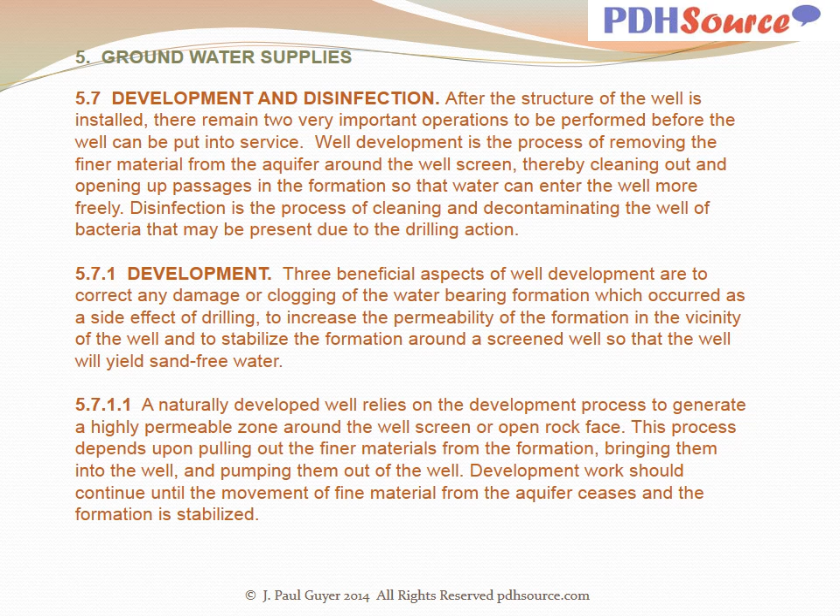Artificial filter packing provides a second method of providing a highly porous material around the screen. This involves placement of a specially graded filter in the annular space between the screen and the wall of the excavation. Development work is required if maximum capacity is to be obtained.

Development is necessary because many drilling methods cause an increase in the density of the formation around the hole. Methods utilizing drilling fluids tend to form a mud cake. Good development will eliminate this skin effect and loosen up the sand around a screen. Removal of fines leaves a zone of high porosity and high permeability around the well, and water can then move through this zone with negligible head loss.

Methods of development in unconsolidated formations include the following. Mechanical surging is the vigorous operation of a plunger up and down in the well like a piston in a cylinder. This causes rapid movement of water which loosens the fines around the well, and they can then be removed by pumping. This may be unsatisfactory where the aquifer contains clay streaks or balls. The plunger should only be operated when a free flow of water has been established so that the tool runs freely.

Air surging involves injecting air into a well under high pressure. Air is pumped into a well below the water level, causing water to flow out. The flow is continued until it is free of sand. The airflow is stopped and pressure in an air tank builds to 100 to 150 psi. Then the air is released into the well, causing water to surge outward through the screen openings.

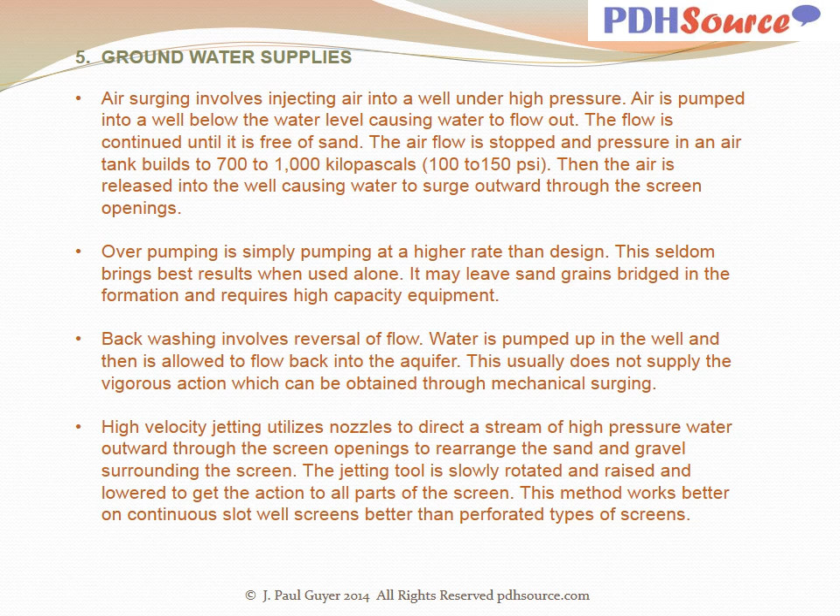Development in rock wells can be accomplished by one of the surging methods listed above or by one of the following methods. Explosives can be used to break rock formations. However, it may be difficult to tell in advance if the shooting operation will produce the required result.

Acidizing can be used in wells in limestone formations. Fractures and crevices are opened up in the aquifer surrounding the well hole by the action of the acid dissolving the limestone. Sand fracking is the action of forcing high pressure water containing sand or plastic beads into the fractures surrounding a well. This serves to force the crevices open.

The disinfection of the completed well shall conform to AWWA publication A100. Bacteriological samples must be collected and examined in accordance with standard methods for the examination of water and wastewater.

Flowing artesian wells often require no disinfection, but if a bacteriological test following completion of the well shows contamination, disinfection is required. This can be accomplished as follows.

The flow from the well will be controlled either by a cap or a standpipe. If a cap is required, it should be equipped with a 1-inch valve and a drop pipe extending to a point near the bottom of the well.

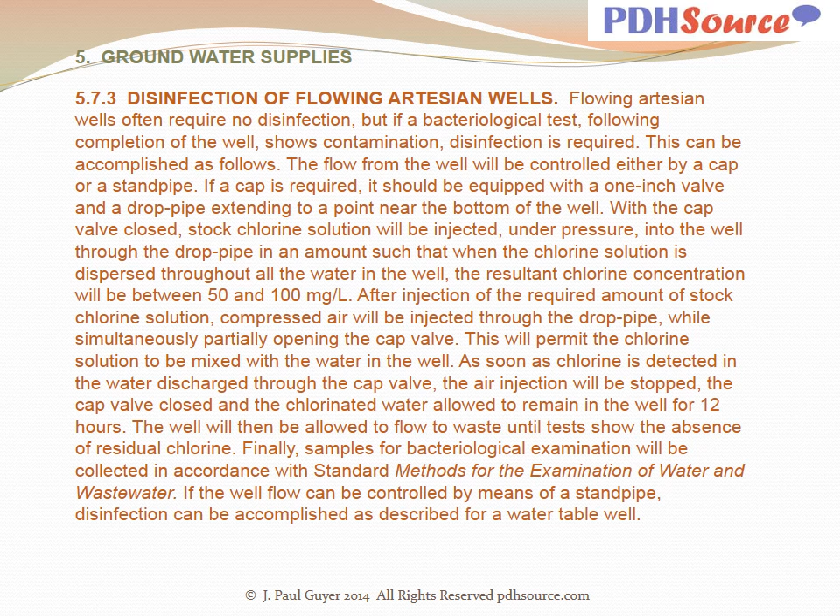If the well flow can be controlled by means of a standpipe, disinfection can be accomplished as described for a water table well.

With regard to renovation of existing wells, well yield can be maintained by proper operating procedures. The most common cause of declining capacity in a well is incrustation, which results from material being deposited on the well screen and thereby clogging the openings.

A second cause is corrosion of the screen, which is a chemical reaction of the metal. This action results in the screen being dissolved and enlarging the openings, allowing caving to occur.

Records of pump performance and pumping levels are very important in a good maintenance program. The effect of incrustation is usually decreased capacity due to clogging of the screen openings.

For incrustation due to calcium deposits or precipitation of iron and manganese compounds, treatment with an acid solution will dissolve the deposits and open up the screen. For bacterial growths and slime deposits, a strong chlorine solution has been found effective. In some instances, explosives may be used to break up incrustation from wells in consolidated rock aquifers.

The best method to prevent corrosion is to use a metal which is resistant to the attack. Once a screen has deteriorated, the only method of rehabilitation would be to remove it and install a new screen. The design of the initial installation should allow for removal of the screen in the future.

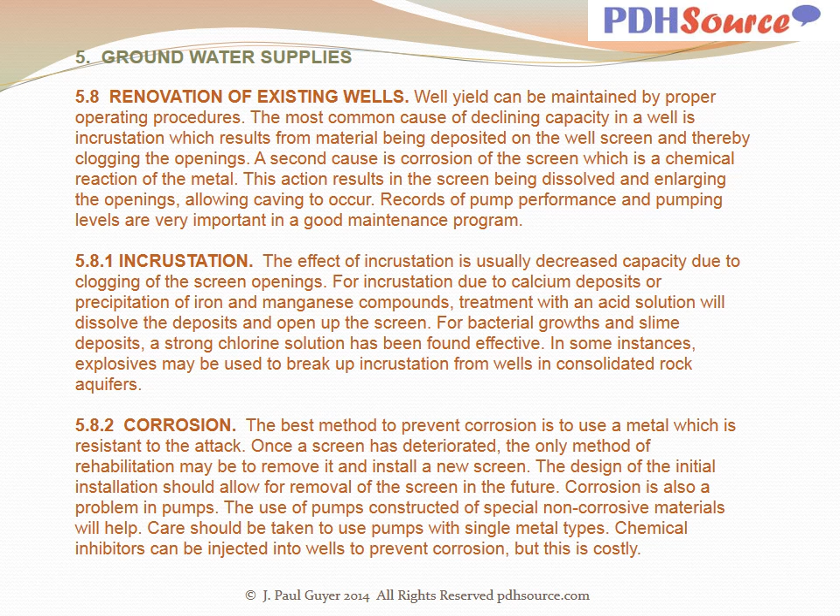Special television equipment has been developed to permit a visual inspection of a well. Special lighting will permit high-resolution pictures even underwater. Wells as deep as 3,000 feet in casings as small as 4-inch diameter can be inspected. The entire inspection can be videotaped for later viewing.

Where incrustation is a problem, periodic well cleaning, also called well stimulation or well rehabilitation, may be practiced. An effective cleaning procedure should be developed and applied annually or more if necessary.

With regard to abandonment of wells and test holes, it's essential that test wells and test holes that have served their purpose and are abandoned be effectively sealed for safety and to prevent pollution of the groundwater resources in the area. The abandonment of wells shall follow the guidance of

A checklist for design: topographic maps of the area where wells could be located.

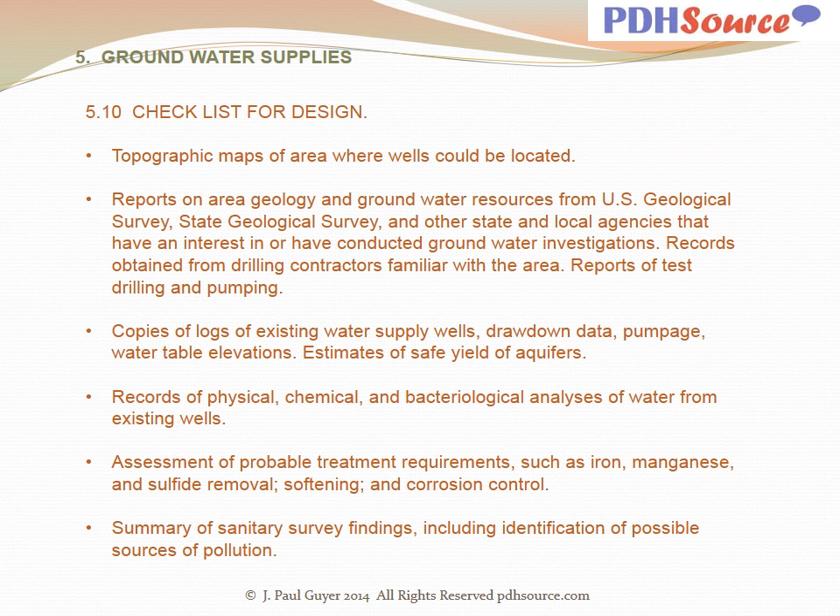Estimates of safe yield of aquifers, records of physical, chemical, and bacteriological analyses of water from existing wells, assessment of probable treatment requirements such as iron, manganese, and sulfide removal, softening, and corrosion control, and a summary of sanitary survey findings including identification of possible sources of pollution.

Probable location, number, type, depth, diameter, and spacing of proposed water supply wells; significant problems associated with well operation; energy requirement of the proposed system; summary of applicable state water laws, rules, regulations, and procedures necessary to establish water use rights; and the impact of proposed use on established rights of others.

With regard to treatment requirements for groundwater under the direct influence of surface water, according to 40 CFR 141, groundwater under the direct influence of surface water means any water beneath the surface of the ground with (1) significant occurrence of insects or other macroorganisms, algae, or large diameter pathogens such as Giardia lamblia, or (2) significant and relatively rapid shifts in water characteristics such as turbidity, temperature, conductivity, or pH, which closely correlate to climatological or surface water conditions.

Direct influence is determined by the state and should be assessed by the installation's environmental office based on criteria established by the state. Per Subpart H of 40 CFR 141, groundwater determined to be under the direct influence of surface water must meet the same source water quality requirements as surface water and will in most cases require filtration. Disinfection must be provided in all cases.

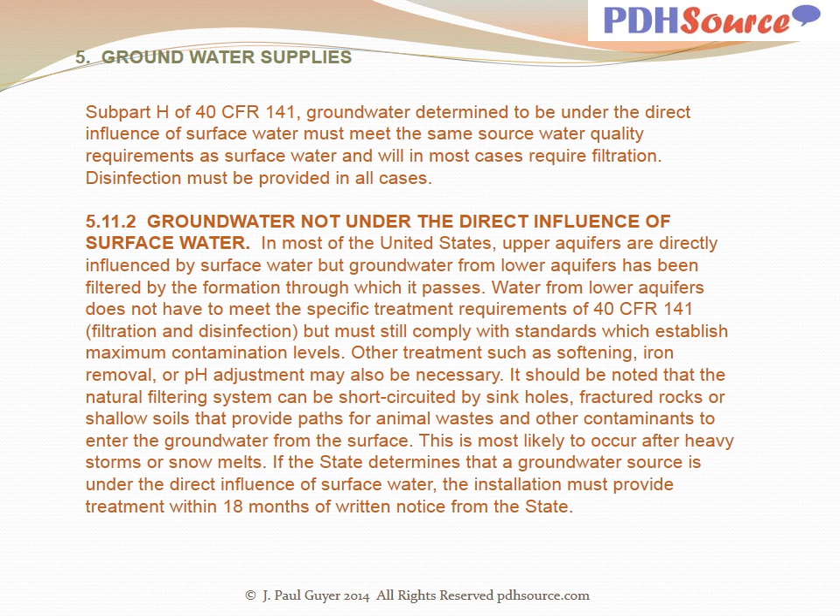If the state determines that a groundwater source is under the direct influence of surface water, the installation must provide treatment within 18 months of written notice from the state.

Surface water supply sources include streams, lakes, and impounding reservoirs. Large supplies of surface water are generally available throughout much of the eastern half of the United States, where rainfall averages about 35 inches or more annually and is reasonably well distributed throughout the year. On the other hand, good surface water sources are much more limited in many western regions, with the exception of the Pacific Northwest, where surface water is plentiful.

Any investigation directed toward development of new or additional sources of supply must include consideration of applicable state water laws. Most of the states in roughly the eastern half of the United States follow the riparian law of water rights, and only a few have permit systems. Under this doctrine, the right to use water is associated with ownership of the land through which the stream flows. The riparian rights doctrine is essentially a legal principle which may be used in some form to settle disputes. It does not automatically provide for state water management and record keeping. Planning for water supply systems under the riparian doctrine is not absolutely certain for present and future water availability and security.

In contrast, Western law is based largely on the doctrine of prior appropriation. In the 17 Western states where this doctrine prevails, sophisticated legal, administrative, and management machinery exists. In these states, water rights and land ownership are separable, and most Western states authorize a water right owner to sell the right to another. The new owner is permitted to transfer the water to another point of use or put it to a different use, provided the transfer conforms to the state's administrative requirements.

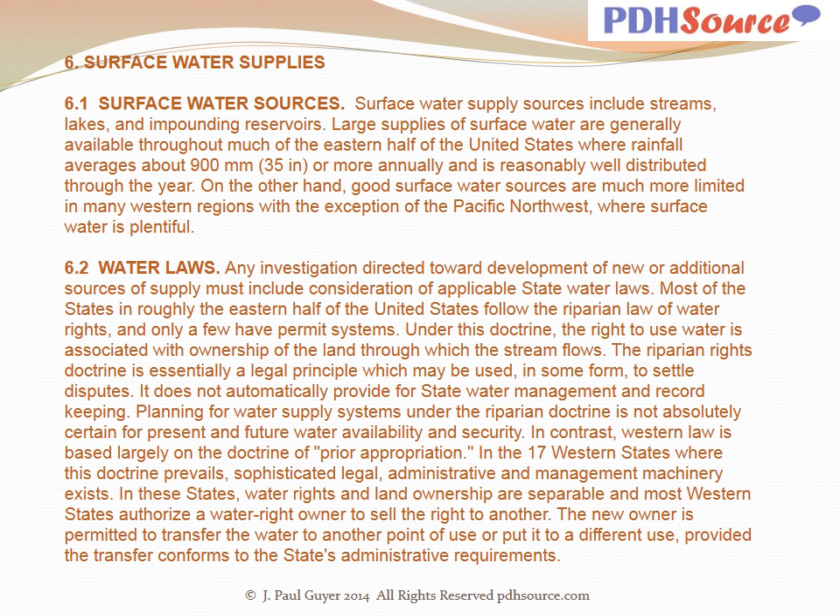The quality of stream and lake waters varies geographically and seasonally. Streams in particular often exhibit fairly wide seasonal fluctuations in mineral quality, principally as a result of variations in stream flow. In general, streams and lakes east of the 95th meridian, which includes most of Minnesota, Iowa, Missouri, Arkansas, Louisiana, and states east thereof, exhibit dissolved mineral solids in a certain range.

These dissolved mineral solids range from 100 or less to about 700 milligrams per liter. The water from these sources, after conventional treatment in a well-designed filtration plant, will meet standards prescribed for potable water. Unusual local conditions, such as pollution, may render some eastern waters unsuitable as a source of supply, but in general, eastern streams and lakes are a satisfactory raw water source.

Similar comments are applicable to surface waters of the Pacific Northwest area. Streams in many other areas west of the 95th meridian are much less satisfactory, often showing dissolved mineral solids in the range of 700 to 1800 milligrams per liter. High concentrations of hardness-producing and other minerals such as sulfate and chloride are found in some western surface waters.

A checklist for surface water investigations. The investigations will cover the following items as well as others as circumstances warrant: topographic maps showing pertinent drainage areas.

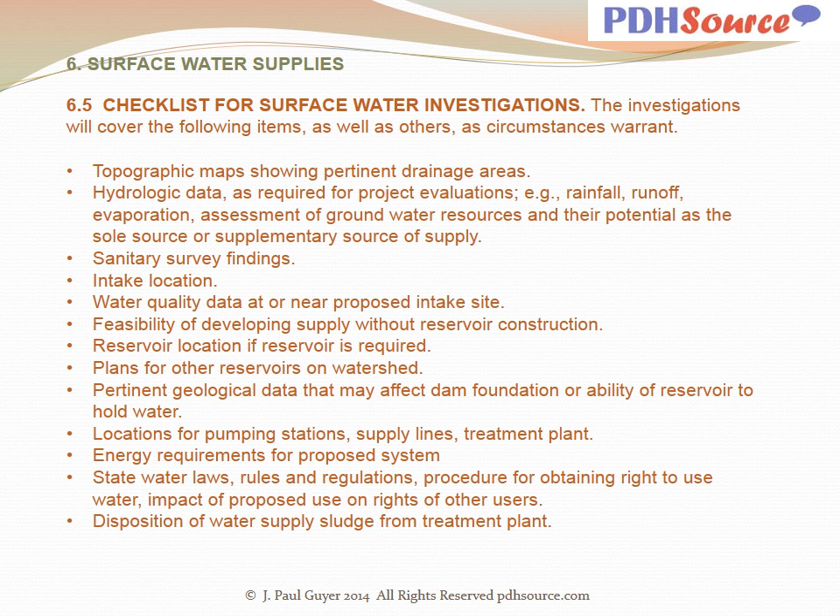State water laws, rules and regulations, procedures for obtaining right to use of water, impact of proposed use on rights of other users, and disposition of water supply sludge from the treatment plant.

With regard to the treatment requirements, the surface water sources must meet contaminant level requirements for fecal coliform and turbidity, or provide filtration. In most cases, filtration should be anticipated. Disinfection must be provided for all surface water sources of potable water. Additional treatment may be required to remove other contaminants.

Now some comments on intakes. Generally, the intake is an important feature of surface water collection works.

For fairly deep streams, those whose flow always exceeds water demands, the raw water collection facilities generally consist of an intake structure located in or near the stream, an intake conduit, and a raw water pumping station. Often the intake and pumping station are combined in a single structure.

On smaller, shallow streams, a channel dam may be required to provide adequate intake submergence and ice protection. Inlet cribs of heavy timber construction surrounded by multiple inlet conduits are frequently employed in large natural lakes. For impounding reservoirs, multiple inlet towers which permit varying the depth of withdrawal are commonly used.

Hydraulically or mechanically cleaned coarse screens are usually provided to protect pumping equipment from debris. Debris removed from screens must be hauled to a landfill or other satisfactory disposal site.

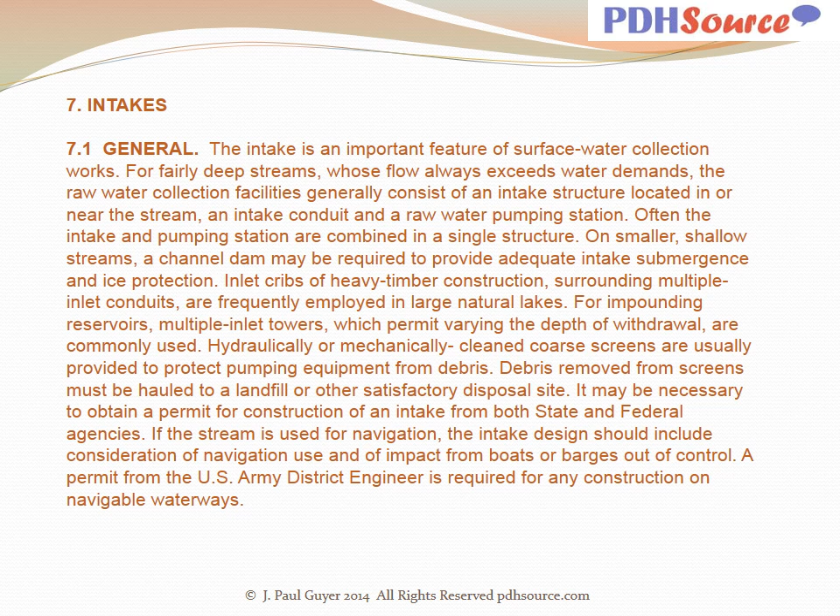It may be necessary to obtain a permit for construction of an intake from both state and federal agencies. If the stream is used for navigation, the intake design should include consideration of navigation use and of impact from boats or barges out of control. A permit from the U.S. Army District Engineer is required for any construction on navigable waterways.

The intake system must have sufficient capacity to meet the maximum anticipated demand for water under all conditions during the period of its useful life. Also, it should be capable of supplying water of the best quality economically available from the source. Reliability is of major importance in intake design because functional failure of the intake means failure of the water system.

Intakes are subject to numerous hazards such as navigation or flood damage, clogging with fish, sand, gravel, silt, ice, debris, extreme low water not contemplated during design, and structural failure of major components.

Many streams carry heavy suspended silt loads. In addition to suspended silt, there is also a movement of heavier material along the bed of the stream. The intake must be designed so that the openings and conduits will not be clogged by bed load deposits. An additional problem caused by suspended silt and sand is serious abrasion of pumps and other mechanical equipment. Excessive silt and sand may also cause severe problems at treatment plants.

Liberal margins of safety must be provided against flood hazards and also against low water conditions. A depression dredged in the stream bed to provide submergence is not a solution to the low water problem because it will be filled by bed load movement. A self-scouring channel dam may be the only means of assuring adequate water depth.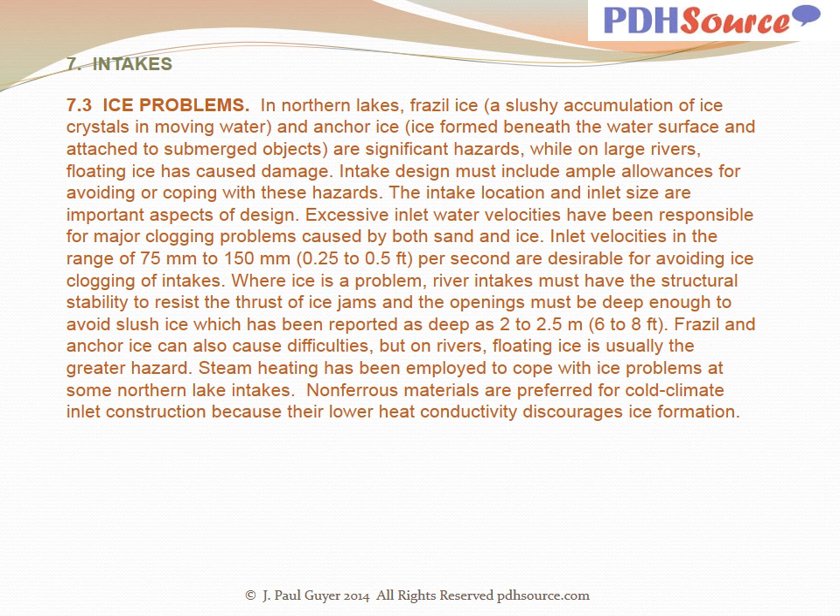Steam heating has been employed to cope with ice problems at some northern lake intakes. Non-ferrous materials are preferred for cold climate inlet construction because their lower heat conductivity discourages ice formation.

Meandering streams in deep alluviums pose especially difficult intake problems. Here, expensive dikes, jetties, and channel protection may be required to prevent the river channel from moving away from the intake or cutting behind it. On such streams, careful consideration must be given to intake location.

Generally, the intake site should be on the outside bank of a well-established bend where the flow is usually swiftest and deepest. If the outside bend site includes a rock bank, a reliable intake probably can be placed there. Inside bends are to be avoided because of shallow water and sandbars. Sufficient depth at extreme low stage must also be a consideration.

In addition to structural and hydraulic considerations, water quality is of major importance in connection with intake design and location, and the water quality aspects of a proposed location should be carefully examined. The location study should include a sanitary survey whose objective is evaluation of the effects of existing and potential sources of pollution on water quality at the intake site.

The survey should include a summary of historical water quality data at the site, plus an assessment of the probable impact of all wastewater discharges likely to influence present or future quality.

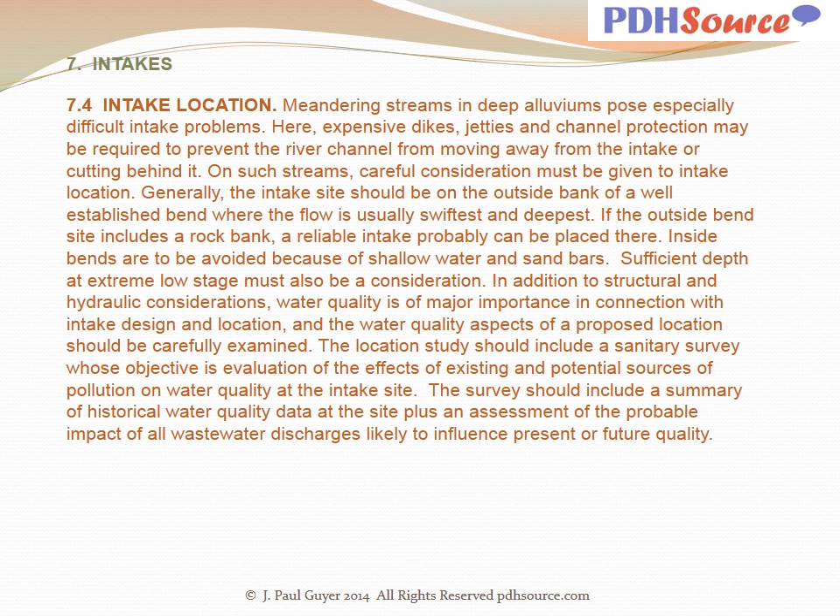With regard to raw water pumping facilities with surface water sources, the pumping station arrangement, the location and arrangement of raw water pumping stations will depend upon the requirements of the local situation, and only general comments can be given. Raw water pumping stations and intakes are often combined in a single structure, but this is not mandatory. The depth of the structure is a function of the type and arrangement of the pumps used.

Horizontal centrifugal pumps are often employed and will give satisfactory performance and good operating economy. However, if the supply is from a variable stream and the pump suctions are to be under positive pressure under all operating conditions, a station of considerable depth probably will be required.

Deep stations of the dry pit type commonly used for horizontal centrifugal pumps should be compartmented so that rupture of pump discharge piping within the station will not flood all other pumps and motors.

The depth may be reduced with some loss in reliability by installing the pumps at an elevation such that suction lift prevails under some operating conditions. Equipment for priming is a requirement when suction lift is employed.

Use of vertical type wet pit pumps, which requires less space in plan, permits a somewhat shallower station, and does not require priming, may prove an economical alternative.

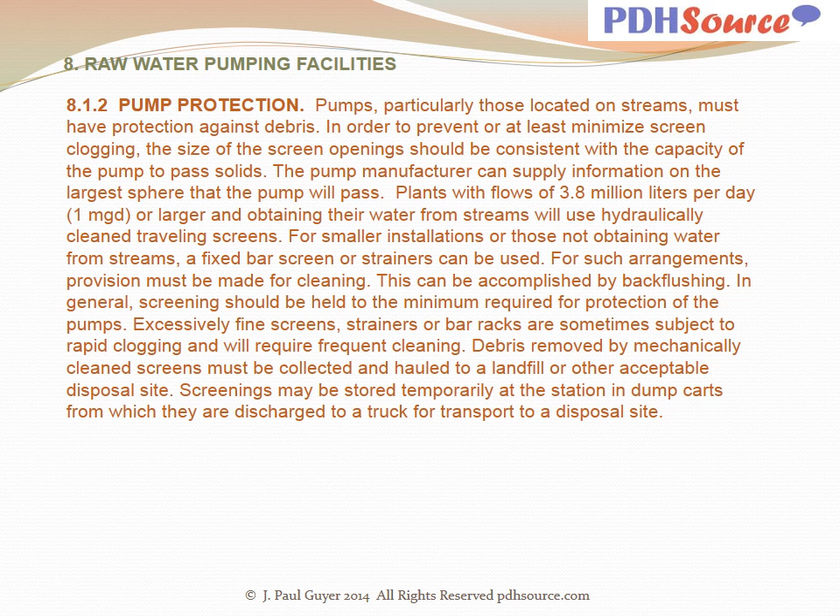Substructures will usually be of reinforced concrete. Superstructures should be of incombustible materials such as reinforced concrete, brick, or other masonry. Wood frame construction should not be used except for temporary or minor installations. Structural design should include consideration of requirements for pump and motor servicing and removal for major repairs.

Where a gravity ventilation system is deemed inadequate to supply fresh air and remove fumes and heated air from the pump station, a forced ventilation system should be provided. The ventilation system should be capable of removing waste heat from the motors without allowing more than a 10°F rise in the temperature of the air in the pump station. For occupied areas, the ventilation system will have a capacity of about 6 air changes per hour. If dust-producing chemicals are to be handled at the station, special dust exhaust systems will also be provided. Where chemicals are used in the pump station, precautions should be taken to ensure that the exhaust from the ventilation system complies with air pollution prevention requirements.

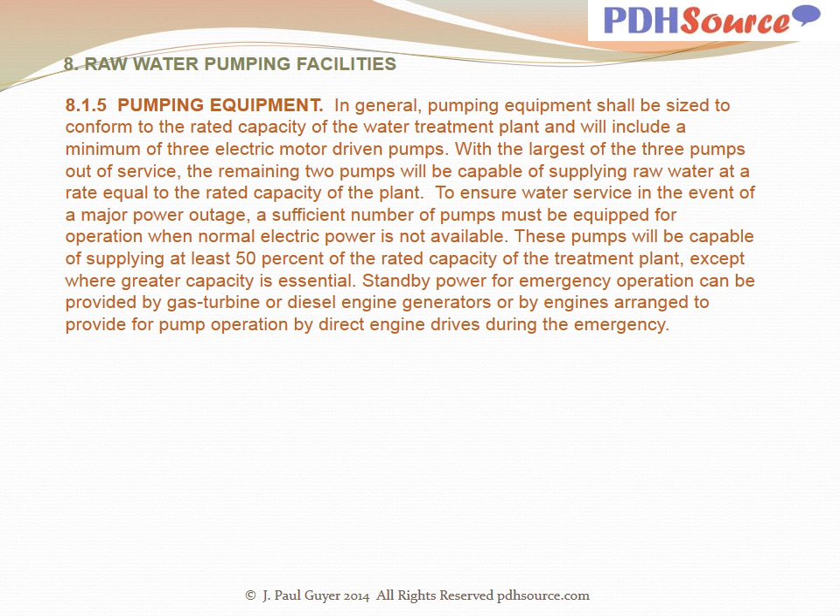In general, pumping equipment shall be sized to conform to the rated capacity of the water treatment plant and will include a minimum of 3 electric motor-driven pumps. With the largest of the 3 pumps out of service, the remaining 2 pumps shall be capable of supplying raw water at a rate equal to the rated capacity of the plant. To ensure water service in the event of a major power outage, a sufficient number of pumps must be equipped for operation when normal electric power is not available. These pumps will be capable of supplying at least 50% of the rated capacity of the treatment plant, except where greater capacity is essential. Standby power for emergency operation can be provided by gas turbine or diesel engine generators, or by engines arranged to provide for pump operation by direct engine drives during the emergency.

For most applications, either vertical line shaft turbine pumps or submersible turbine pumps will be used. For small capacity or low head applications, rotary or reciprocating piston pumps may be more appropriate. Factors influencing the selection of pumping equipment include well size, maximum pumping rate, range in pumping rate, maximum total head requirements, range in total head requirements, and type of power available. Final selection of pumping equipment will be based on life cycle cost considerations.

If all pumps use electric power as the primary energy source, a sufficient number of the pumps must be equipped for emergency operation when normal electric power is not available. Emergency power can be provided by gas turbine or diesel engine generators, or by engines arranged to provide for pump operation by direct engine drives during the emergency. These standby power pumps will be capable of supplying at least 50% of the required daily demand, except where greater capacity is essential.

If dual electric power feeders, breakers, transformers, and switchgear can be provided, they will increase the station's reliability but may add appreciably to its cost. If a high degree of reliability is deemed necessary, the station should be served by independent transmission lines that are connected to independent power sources or have automatic switchover to direct drive engines. Supervisory or remote control of electric motor-driven pumping units should be provided if such control will substantially reduce operator time at the facilities. Life cycle costs will be applied.

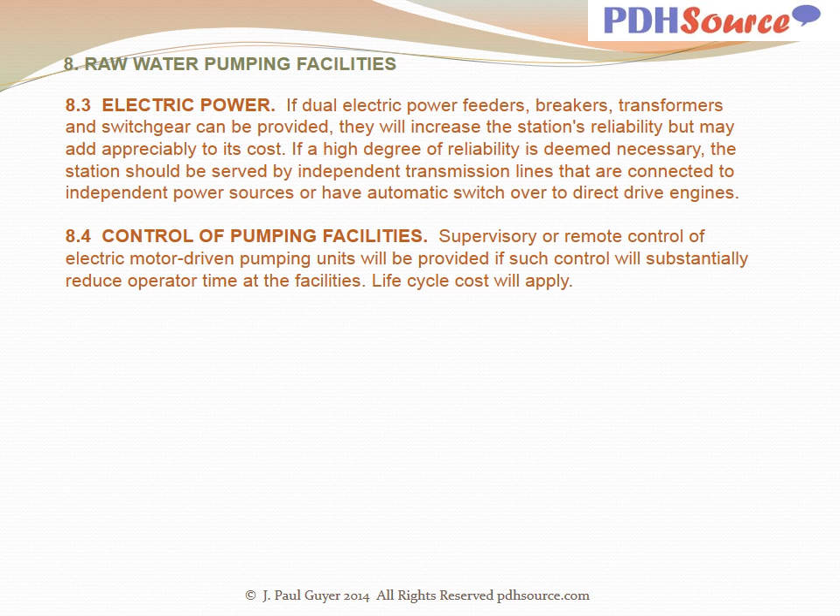There are some comments on the water system design procedure. Generally, water supply is an essential feature of any large project, and water system planning should be coordinated with the design of the project elements in order to ensure orderly progress toward completion and with an installation's comprehensive water resource management plan. Major elements of the water system, such as supply works, usually can be located and designed in advance of detailed project site planning. On the other hand, the design of the distribution system must be deferred until completion of topographic surveys and the development of the final site plan.

The preparation of plans and specifications for water supply works, pumping stations, treatment works, supply lines, storage facilities, and distribution systems requires the services of professional engineers thoroughly versed in waterworks practices. Cross connections between potable and non-potable water systems are prohibited.

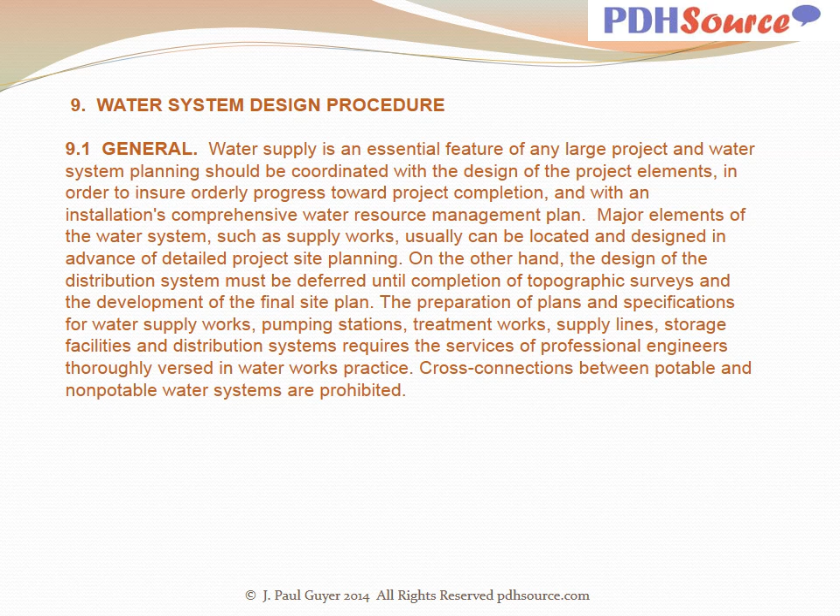Selection of materials, pipe, and equipment should be consistent with system operating and reliability considerations, energy conservation, and the expected useful life of the project.

To avoid delivery delays, standard equipment that can be supplied by several manufacturers should be specified. Delivery schedules must be investigated prior to purchase commitments for mechanical equipment. As a general rule, patented equipment furnished by a single manufacturer should be placed in competition with functionally similar equipment available from other suppliers. Equipment of an experimental nature or unproved by actual full-scale use should not be used unless specifically approved.

Materials such as lead, copper, and asbestos have in the past been commonly used in pipes and other components of water supply facilities, but have been determined by the Environmental Protection Agency to be detrimental to public health. Any pipe and fittings used in a system providing water for human consumption shall contain no more than 8% lead, and any solder or flux used shall contain no more than 0.2% lead.

Copper contamination is a byproduct of the corrosion of copper pipe and fittings. Acidic groundwater is a common cause of corrosion of copper pipe. Therefore, copper material should not come into contact with acidic water until after it has been neutralized. Since copper piping is common in plumbing systems, federal regulations require that optimum corrosion control procedures be used for potable water systems. Asbestos and asbestos cement products shall not be used.

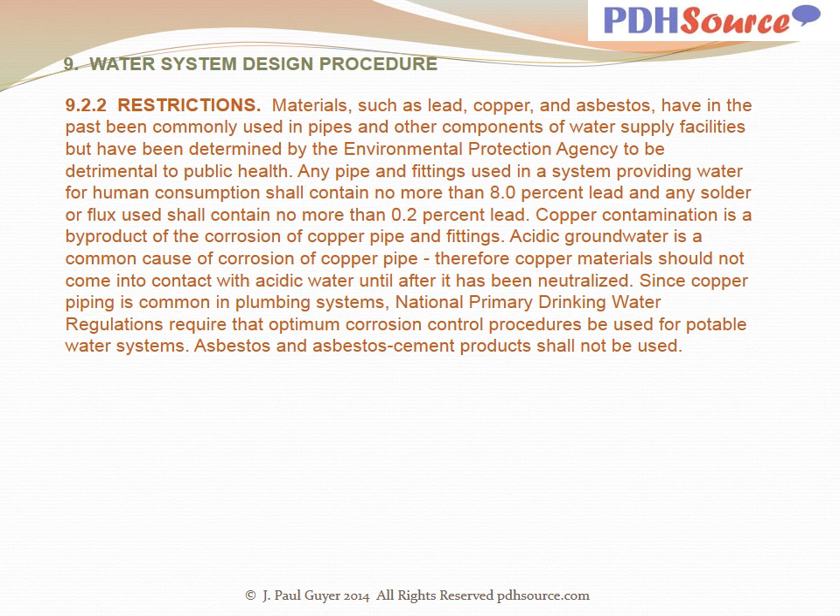For each water supply alternative considered, energy requirements will be clearly identified, and the design analysis should include consideration of all energy conservation measures consistent with system adequacy and reliability.

We now have on the ensuing slides a bibliography that you may refer to from time to time in the future.

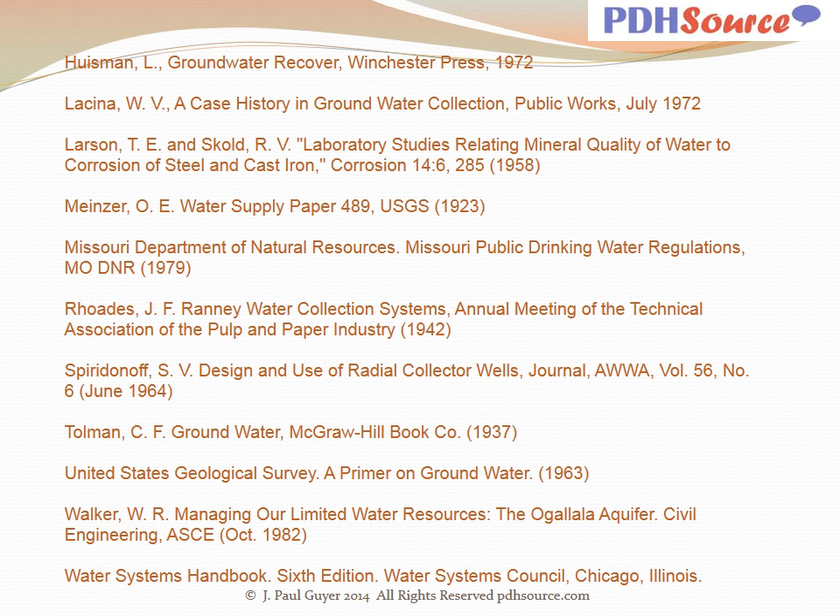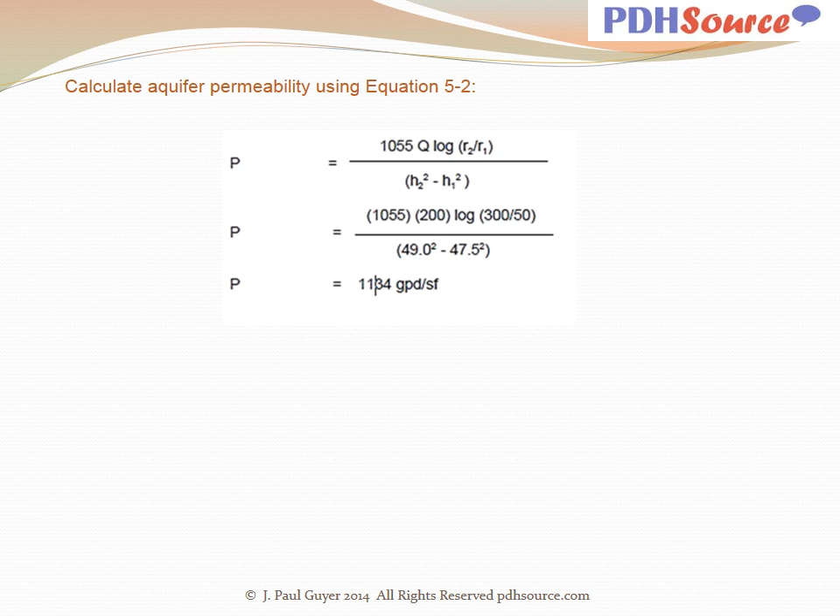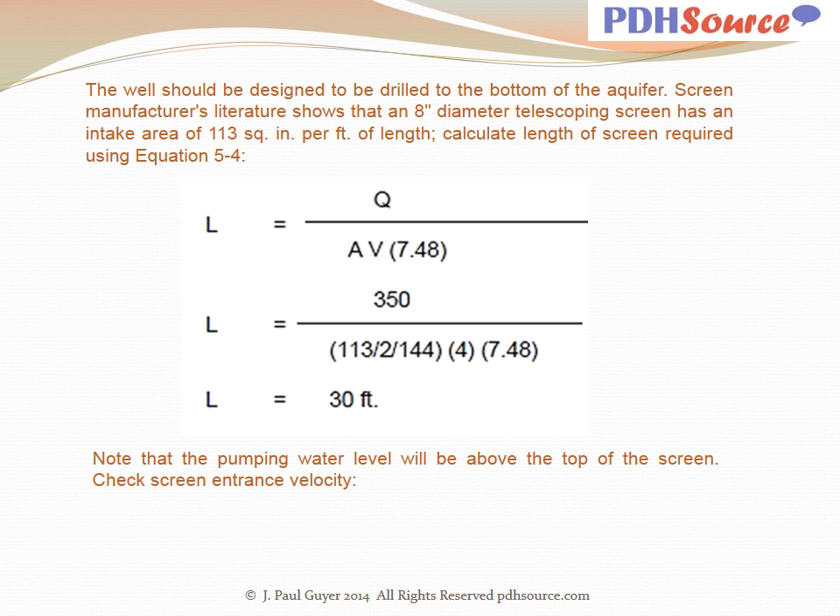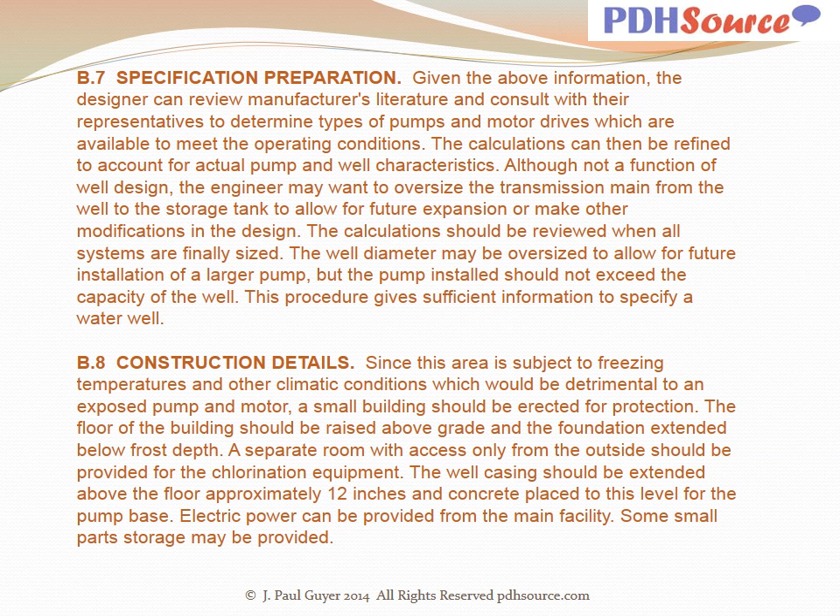Appendix B provides a sample well design which you may wish to review at your leisure. Appendix C provides some brief comments on drilled wells.

Wells are normally constructed by one of the following methods: hydraulic rotary, cable tool percussion, reverse circulation rotary, hydraulic percussion, and air rotary. These methods are suitable for drilling in a variety of formations. Diameters may be as large as 60 inches for wells constructed by the reverse circulation method. Smaller diameter wells may be constructed by drilling to depths of 3,000 or 4,000 feet. For a detailed discussion, literature is available. The first two methods listed are the most common in well construction, and a brief description of each follows.

In the hydraulic rotary method of drilling, the hole is formed by rotating suitable tools that cut, chip, and abrade the rock formations into small particles. The equipment consists of a derrick, a hoist to handle the tools and lower the casing into the hole, a rotary table to rotate the drill pipe and bit, pumps to handle mud-laden fluid, and a suitable source of power. As the drill pipe and bit are rotated, drilling mud is pumped through the drill pipe, through openings in the bit, and up to the surface in the space between the drill pipe and the wall of the hole, washing the drill cuttings out of the hole at the same time. The borehole is kept full of a relatively heavy mud fluid. Due to its viscosity, this fluid exerts a greater pressure against the walls of the hole than the water flowing from the water-bearing bed. Therefore, the mud tends to penetrate and seal the pore spaces in the walls and prevents caving. Water under low hydrostatic pressure, the pressure exerted by the weight of the water in the water zone, cannot force its way into the hole.

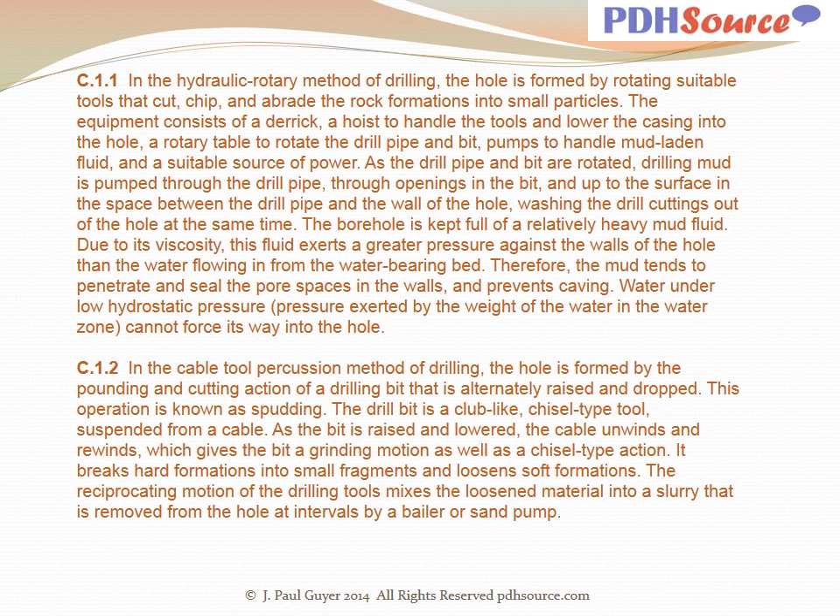In the cable tool percussion method of drilling, the hole is formed by the pounding and cutting action of a drilling bit that is alternately raised and dropped. This operation is known as spudding. The drill bit is a club-like chisel-type tool suspended from a cable. As the bit is raised and lowered, the cable unwinds and rewinds, giving the bit a grinding motion as well as a chisel-type action. It breaks hard formations into small fragments and loosens soft formations. The reciprocating motion of the drilling tools mixes the loosened material into a slurry that is removed from the hole at intervals by a bailer.

And this brings us to the conclusion of this brief discussion of water supply systems. I hope that it has been about what you were looking for, and that it will provide you with some technical guidance you'll be able to use moving forward as water supply projects from time to time come across your desk at your agency or in your office.